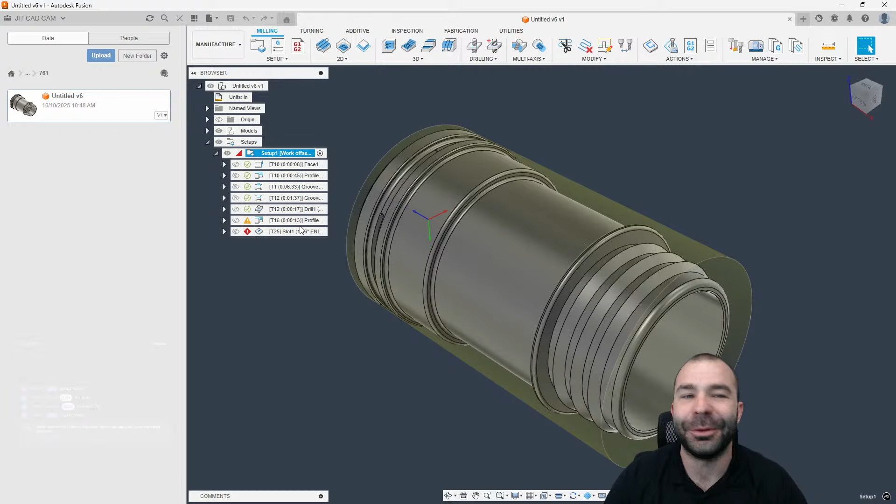Steven Casper's in the chat, which just so happens, we're going to go ahead and start sharing our screen, and we're going to kick this off in honor of him. So, of course, in typical fashion, I went ahead and made a Facebook post, and all of a sudden, we got like 8 or 9 different problems sent to us today. So, right off the bat, we have a lovely mill turn part.

Now, the concentrated area that we have on this part in particular are going to be these 3 slots on the part. So the first thing I'm going to do is inspect that very first one. And as you guys can see, that's a diameter of 0.75. Now, presumably, I would need an end mill that exact size to cut that slot perfectly. However, we're going to be able to get away with using a smaller end mill.

So from the start, the old school way to do something like this would be along the lines of doing a 2D contour. And with that 2D contour, we're going to go ahead and do a wrapped toolpath. And what we want to wrap around, again, this is anywhere that's round on your part. Moving a little bit further on, we now need to define our geometry. And if you guys don't know, you always just pick one and go from there. So there's some geometry, and we're going to see if we can get a toolpath.

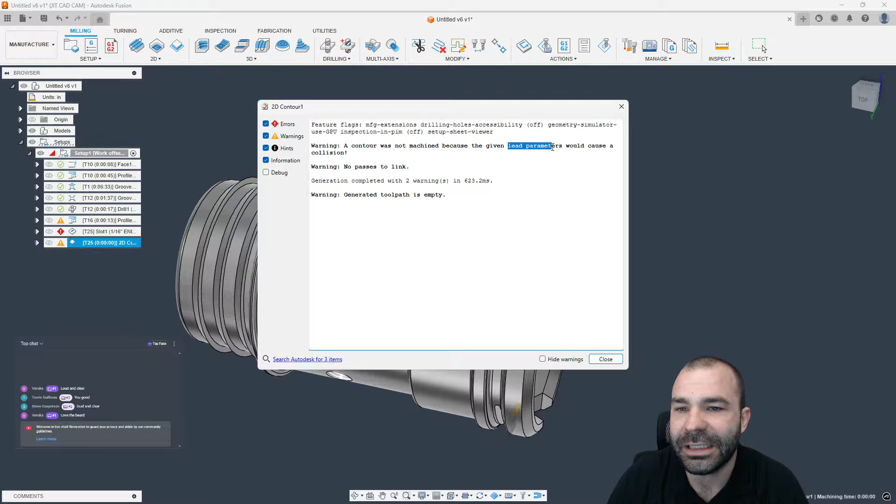Now, we are getting what looks like an error, which is no toolpath whatsoever. So right off the rip, this is the great thing about Fusion. I can't stress this enough: I love the fact that when there is a problem, at least it gives you some clues as to what to change. A lot of people overlook this, but as you're going to see, it tells you right here in this line: the given lead parameters would cause a collision.

So again, if you're new to Fusion, sometimes it's easier to turn off things like leads and transitions so that we can at least get the blue lines on the part. Now, as you guys can see, we do have those lovely blue lines on the part. However, something I'm noticing here, and we're going to do a little section analysis of this. So again, we're going to go up to Inspect, Section Analysis.

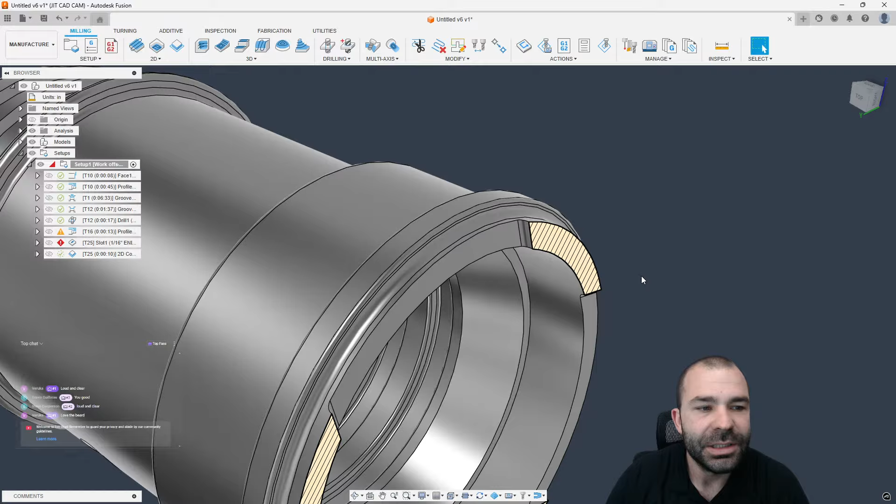Now, we could pull off the back flat of our part. I'm actually going to pull off the flat inside my part, and then I'm going to bring that forward just a hair. Now, knowing that we did have that 0.75, I could go 0.75 divided by 2, which is the width of my slot. And this now makes it so that I can evaluate or see what exactly those slots are doing.

Now, this is interesting because initially when I saw this part, I made the assumption that we were going to need to wrap a toolpath around the cylinder. And that's not the case here. So again, this is the fun of Fusion and being able to evaluate things.

Oh no, am I frozen? I am frozen. Is my screen frozen? It is not. Give me a sec, guys. I've had this in the past. I'm going to go ahead and kick my camera off, possibly back on. I may have to come back and restart something here. So give me a second here. So 1 second here.

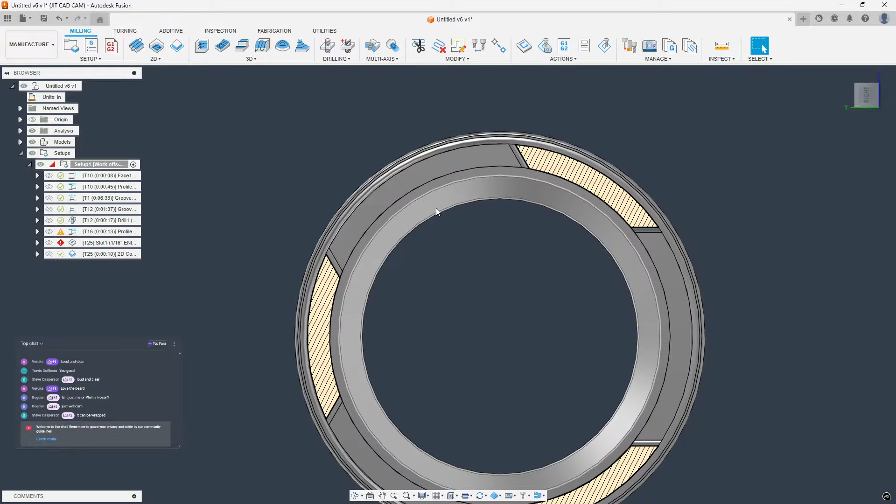So Steve is telling us that it can be wrapped. However, it really doesn't need to be wrapped. Now, the importance here is we are either going to need an end mill that is going to stick out long enough to reach all the way down to the bottom edge, or we can actually pivot to use what's called the trace toolpath. Now, the trace toolpath is great because although it's in the 2D section, it actually works like 2D contour, but allows you to follow different Z heights.

So if I go ahead and go 2D trace here, we're going to give it our curve that we want to follow, which is going to be that lower chain again. And then we're going to hit OK. And of course, as you may or may not be able to guess, I failed to use tool orientation properly. So let's fix that. We're going to go to our tool orientation. We want our Z axis to point upwards. We could use the edge or one of the ends of the cylinder. And just like that, our tool is now coming in from the top and tracing around that profile.

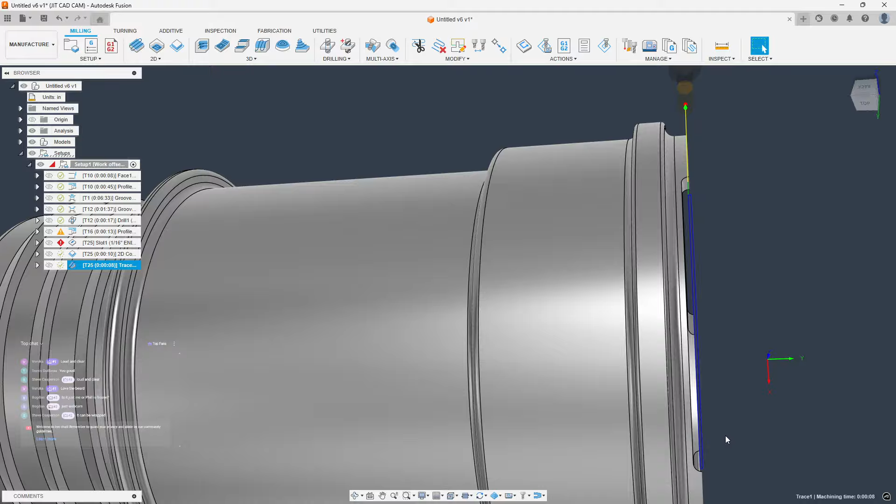Now, something we do have to be aware of here: trace by default is going to follow the center line of the tool. And we're going to need to turn on our cutter comp. So go left, of course. And now you can see we actually have our toolpath going down and around and coming back up to create that profile to cut the slot.

Now I'm going to reorder this a little bit because if I go back in my timeline, as you can see, Steve has already gotten a lot of his toolpaths in place. And if we hit F8, which is the hotkey, to get this section analysis out of the way, we can then update our CAD information. And just like that, you're now seeing that we are milling that slot. Now, just like anything in the world of 2D, usually you want to have a little bit of a breakthrough. So we can go ahead and add that in. And what you're going to notice here is in the trace toolpath for heights, you don't have contour, selected contour, right?

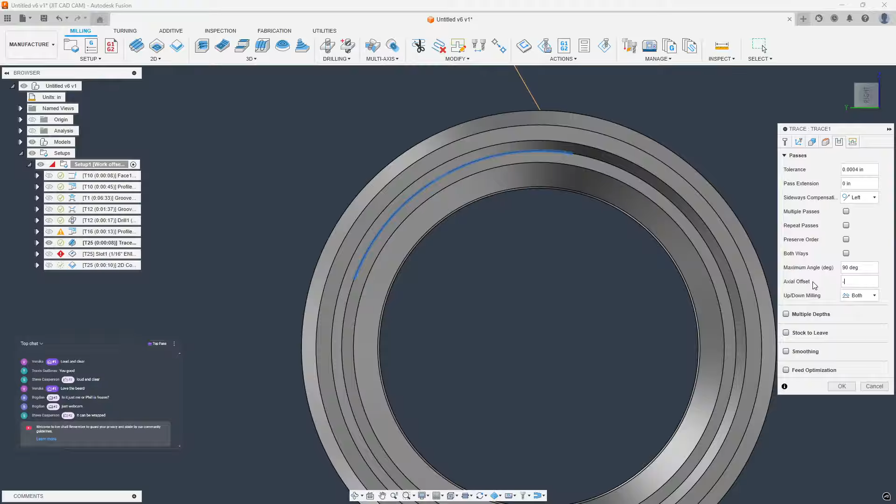So we're going to jump to the passes tab where we can actually set an axial offset. So axial offset is going to work the same. We're going to go ahead and say minus 0.05. I feel like every time I go in and punch that in, I'm usually backwards. And in this case, I am not.

So as you can see, if I was to simulate this toolpath now, again, props to the Autodesk team for the simulate with GPU. We could go ahead and bring that tool down. Again, we're going to go up, over, and back the other way. Now, as you're seeing me do here, we are still plunging into the part. So something we might need to do, and I don't know if it has it, is we do not have the ability to ramp down.

So again, this is one of those scenarios, although you could do a lead in and lead out, we cannot ramp that tool down to be able to cut that groove out. Now, me personally, if I was running something like this, maybe I'm doing 10, 15 parts, I might just hit this with some multiple depths and treat it like a pocket clearing type of situation. So again, as you can see, you could go ahead and set your multiple depths relatively easy, and then you're making multiple passes in there. Again, just kind of a high feed machining scenario.

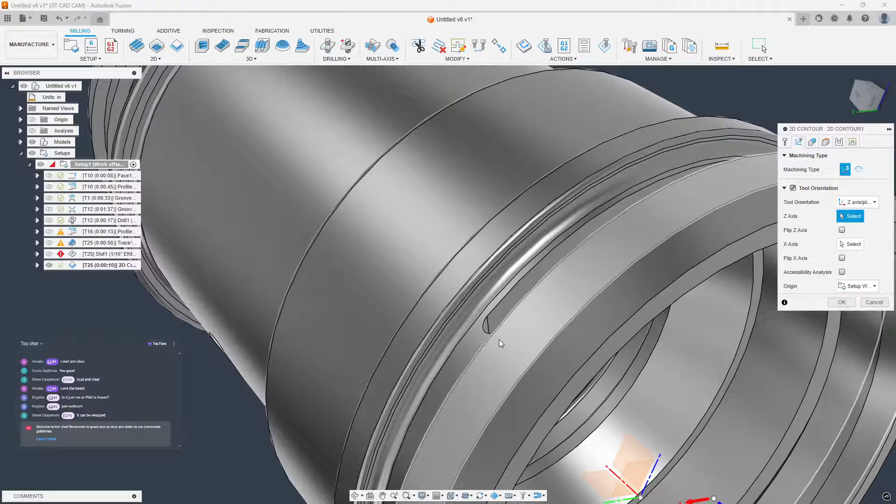This again is one of those things that based on what you're trying to do or how you're trying to remedy and solve this issue, utilizing something like 2D contour might actually work better, or not 3D. Actually, 3D contour might not be too bad, but not wrapping the toolpath as I initially did. Again, we're still going to need tool orientation here because we want our Z up. And what you're going to see in this example is the fact that this is actually going to sit flat across that whole part, versus following and trimming on the inside of that cylinder.

So again, what I would like about 2D contour is we could turn on ramp, and then just like that, we're now zigzagging down and ramping into that part profile. So let me know, Steve, in chat, does this look like it's going to work for you?

Again, guys, I'm going to go ahead and jump over, and I'm going to see if I can't get my webcam to reboot one more time. Give me a sec, guys. It looks like NVIDIA Broadcast is getting me. I'm going to go ahead and force restart that and see what happens. I used to have this problem in the past, and I think it was remedied when there was a Windows update, but since then it has come back to haunt me. So give me a few seconds here, guys. Again, if you guys have any questions, feel free to throw them in chat. Let me know what you think. Do you like what you see so far? Do you have any questions? And we're going to go ahead and see if we can't get this rebooted.

Ash Designs with a question. Hey, Phil, I'm wondering if it's possible to lock the B axis at a certain angle while spinning down a cylinder part, like a rotary parallel. Yep. So there is a way to do that, and I'm going to show you guys how to do that here in a minute.

Let me see if my camera is back up and running. You guys let me know. Am I still frozen? Of course I am still frozen, but I have a secret weapon. You guys are going to have to deal with my beautiful face. And now you can see my lovely flower background in my office. We're going to go back and see if we can't get normal back. There we go. We are back. All right. Now we can get back to our screen share. I can turn my lovely face on all these slides. Again, guys, at any time, if you guys have questions, throw them in chat. Let's get back to the old screen share here.

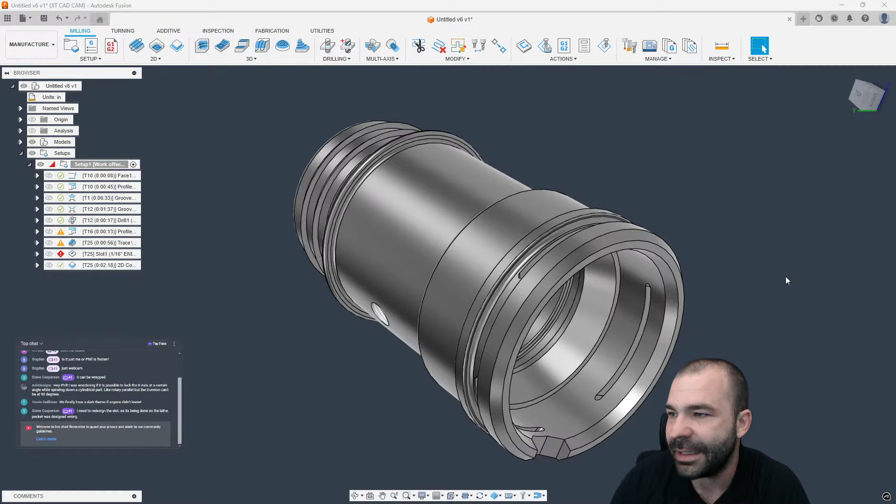Steve, I see you out there. I need to redesign the slot as it is being done on the lathe. Pocket is designed wrong. Okay, and we could remedy that real quick. Let's see what you got going on. You did a pattern, very beautiful. You did a straight extrude. Now that's not the case for what you need to be doing, but we need to wrap said slot. Now I am going to take this slot, and we're going to go ahead and double check your sketch here real quick.

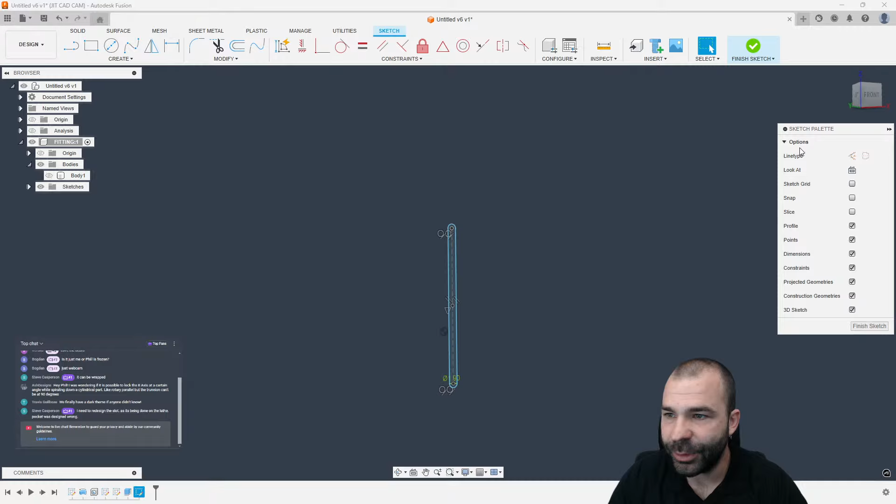Looks like you're utilizing a line to hold this on center. And I'm actually going to break this a little bit more than I expected. There we go. Let's get this dimension out of the way. And then what I'm really looking to do is move. Yours truly is having some problems here. We're going to remove this guy. We are going to get our body out of the way because I think it's going to work better for us. There we go. Square up to our part here.

And now with that, we want our slot to probably be a little bit off of center because this is going to wrap around our part, right? So I'm going to go ahead and throw in a construction line on this guy. Maybe. Man, I'm just not having luck here. Oh, I got 3D sketch turned on. Guys, that'll always cause you kinds of problems. Let's get 3D sketch turned off. Let's go ahead and do our normal sketch now. And we might have to back this up a little bit further because I may have butchered this long before.

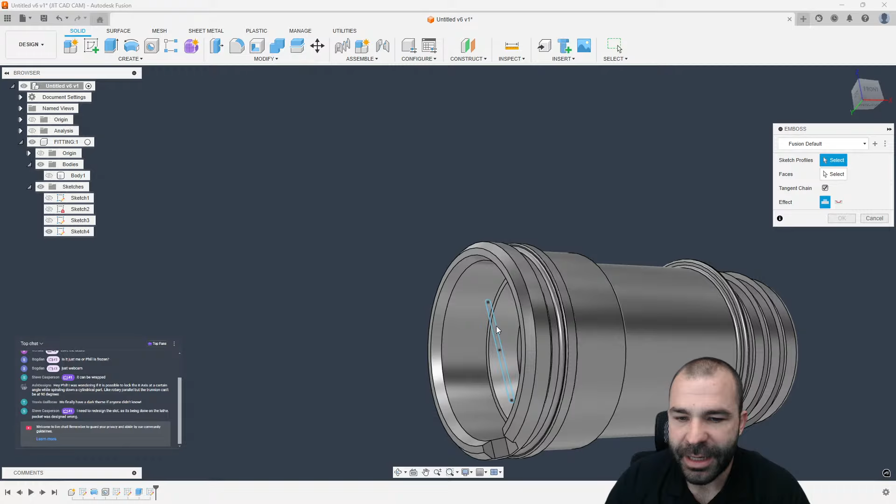We could go ahead and try to wrap this. I don't think it's going to wrap where it sits. And I don't want to bore you guys to death by having to go in and make a bunch of changes. But what we're looking for is under the Create tab. It's called Emboss. Now, we're going to go ahead and revert our position back because, of course, yours truly started moving things around. But we want to take that sketch profile, and we would like to wrap it around our cylinder. And this is what I was worried about, is I did know that we were going to get an issue because that actual slot is down on our part.

So what I'm going to do is I'm going to go ahead and start with a fresh sketch here real quick. And I'm going to do an offset. Actually, we won't need to do an offset plane. It'll be all right. There we go. We're going to sketch on that flat. Apparently, I keep moving stuff around. I'm going to create a brand new slot here, center to center, just to be safe. And now I am doing this off to the side, guys. So just so that you're aware, if you're trying to do this at home, that is what's going to happen.

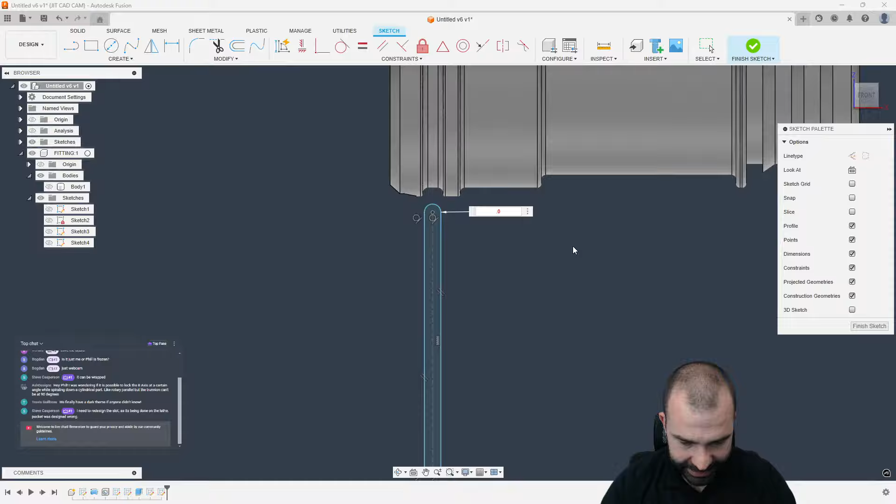We're going to go, what is that? 0.75, technically divide by 2 because we are radius. And of course, it jumped out in the middle of nowhere. Try that one more time. Maybe my math is just way off today. Let's just go, we're going to go 0.62. Oh, because we're in millimeters.

Do you guys see this? You guys see what you guys put me through? This is why I get all the fancy support tickets and all that fun stuff.

We're going to go back to inch. There we go. And for those of you wondering, yes, at the end of the day, we could have very easily went in and actually just said IN versus the other 0.075. There we go. Actually, it's 0.75 divided by 2. Give her a second to update. There we go. And now we can get this guy moved semi to where that slot is going to go, right? So again, using the emboss feature, you can't be on center line of what you're doing, which is why I've created my sketch down here. Now we should be able to get the emboss feature to work.

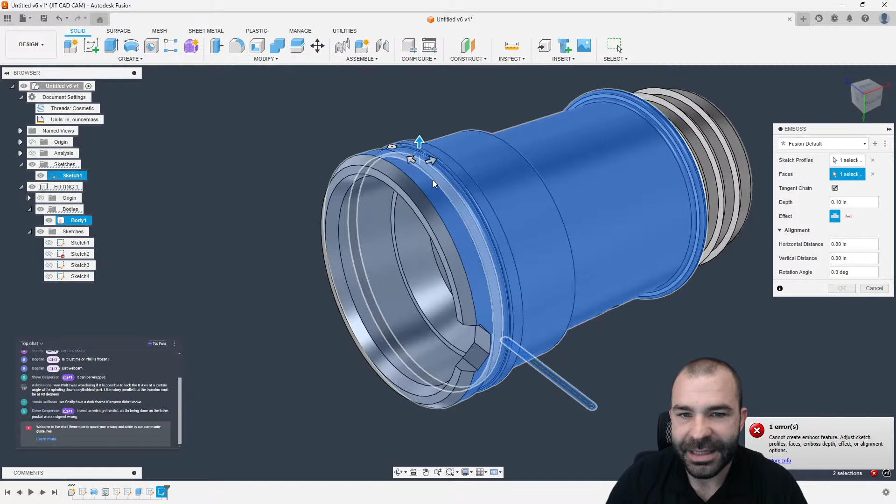And in this case, we're going to go ahead and do a deboss. And maybe I'm crazy in my thinking here, which would be pretty normal, right? Is that this is not working to my advantage when it should be. And we may have to make a few more adjustments, but I don't want to get too caught up in this. Again, the emboss feature works great. I'm probably doing something wrong. It's usually on me, as you guys know. We're going to go ahead and jump to another problem here, and we're going to have to see.

So we finally have the dark theme. Travis, 100%, the dark theme is completely available inside of Fusion, if you guys didn't know. Now, this is a personal preference thing. I'm not really a big fan of it. Maybe I'm just stuck in my old ways. But how you can set that up is I'm going to go into my preferences, and I'm going to go down to either Fusion, or you could, I apologize, dark blue, or you could do match device theme.

So as you guys are going to see here, as soon as I hit apply and OK, I am now officially in what is referred to as dark mode. And just like that, you could have your display and your toolbar and all that fancy stuff now dark. Again, putting this out to Autodesk, it'd be nice to see black outlines on all the icons, I think, or white outlines, something of that nature, so that they pop out a little bit more.

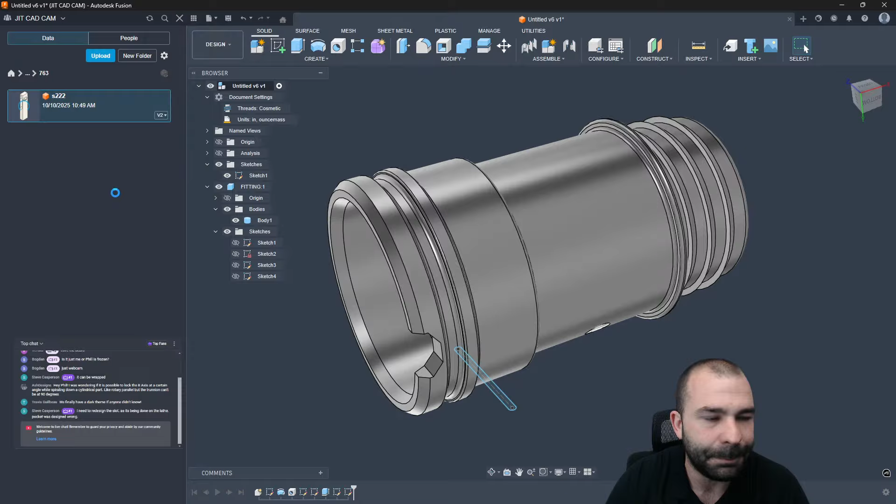So let's go ahead and shift gears. We're going to go ahead and open another part here. We will come back to this at some point today if the questions slow down, of course. We got to get back into the right folder. We're going to jump into this next part. Actually, it's not going to be that one quite yet. Let's go 763, is it? Yep. So somebody sent me this part.

This is another really fun part, but if you guys can see, we have these green surfaces inside of here that they are wanting to 3D machine. Now, for those of you that don't know the great world of machining, if I go in and I actually do an accessibility analysis from the top, what you guys will notice here is anything in red there is considered undercut, right? So if I'm looking at this from this angle, I would need a second operation to come in from the side,

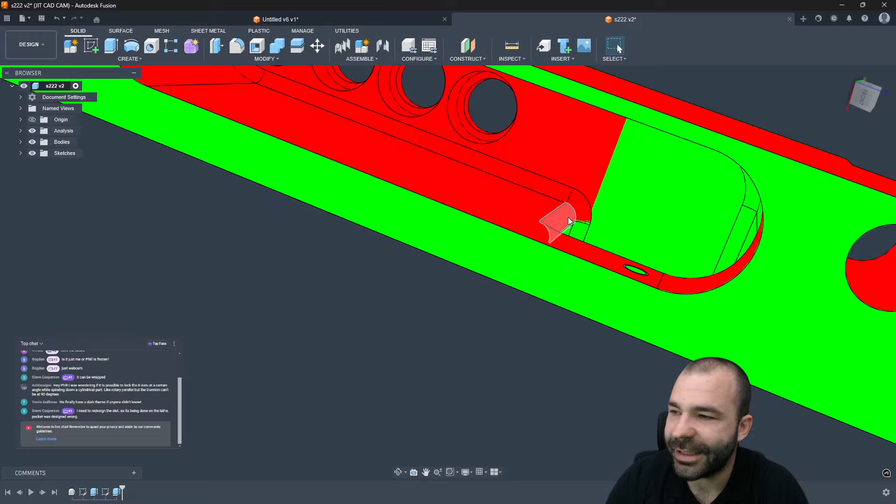but it gets worse than that, because if we did another accessibility analysis from the side of the part, as you guys are seeing, we now have undercutting back the opposite way. So this feature is a very hidden feature when it comes to machining. Now, there's not going to be any good way to really do this. We are going to have to do this across two setups, or if you have a 4th or 5th axis machine, it's going to be much more beneficial. But I'm going to show you guys how you could get some tool paths down in there. Let's go ahead and jump into the manufacture section.

I need to grab a drink here. Also going to go ahead and check the ticket system here real quick for you guys. Want to make sure that nobody has sent us any tickets outside of the ones that you guys have already hit me with.

So let's go ahead and start doing some of our setups. So again, we are going to have to do this with two separate setups, or you're going to need a 4th or 5th axis. And what you guys are seeing me do here is nothing more than setting my X's, Y's, and Z's. I'm probably going to put this on a UMC type of machine. It'll make my life much easier. And just like that, fixed size box. And it looks like we are getting some pretty wild rounding on this part.

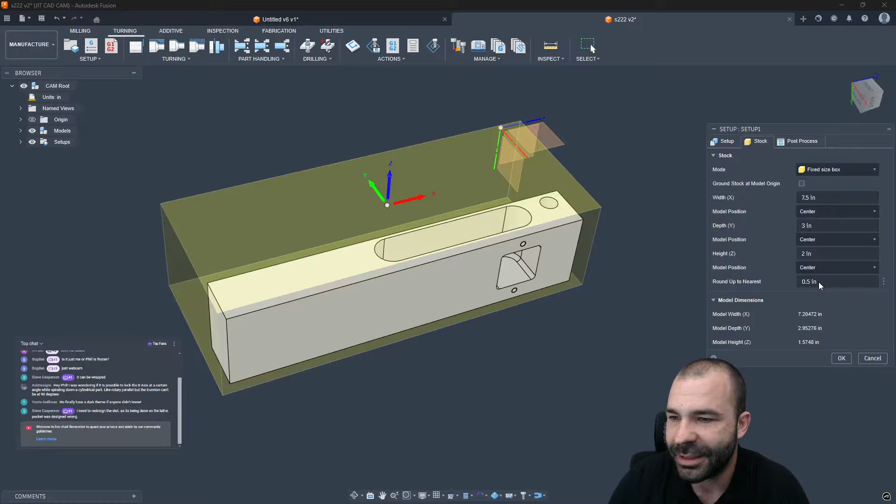Now, I never check my models, but occasionally there's a million things going on inside these files. So what we're going to do is jump back and make sure we define the proper model, as you guys can see. And then for the sake of this part, we're just going to go ahead and round up by 0.5 as if it's coming out of a squared up block of material, right? This is just going to make everything we do at this point much easier.

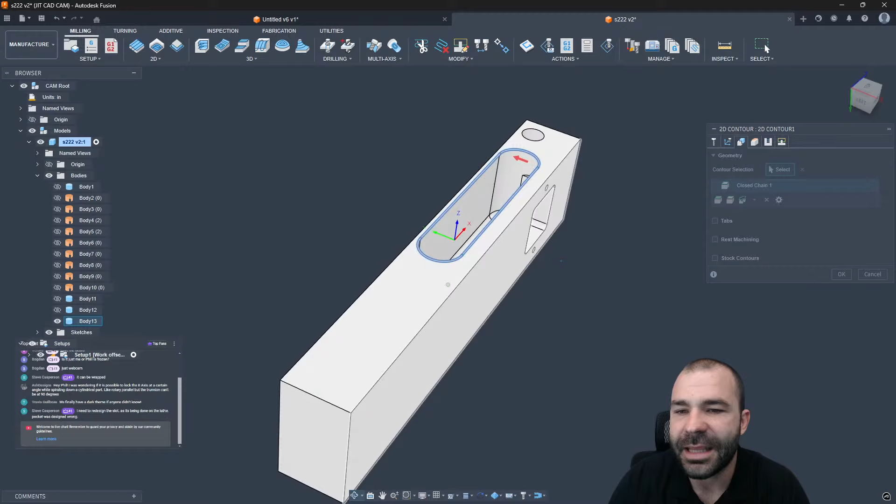Again, I'm going to make my life easy, and we're just going to 2D contour. And I'm going to utilize probably a 1/2" end mill. If you guys don't know, I love the 1/2" end mill. Tends to work quite well for a lot of things. And the geometry I'm going to use is the upper rail. Now, I'm going to put this out there in chat, guys. Why is it that you think I'm going to use this upper edge to define my boundary versus any other edge on this part? And I am going to now just go ahead and define a different lower height.

So as you guys are looking at this, we're going to go ahead and go no lead in, lead out. Again, cheating and using ramp. But as you can see, I'm now zigzagging down inside of my part from the top. If this, again, was something where we're starting to discuss utilizing a 4 or 5 axis machine, this is where I might pivot to 2D adaptive clearing. Let's say, for example, we switch to a smaller tool. I believe I have a 1/4 inch tool around here somewhere.

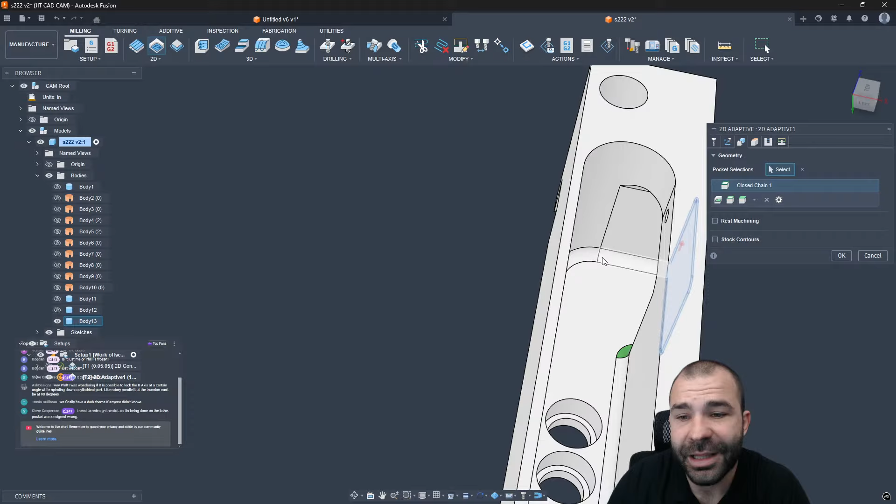We do our tool orientation to the side. Again, pocket selection. As you guys are seeing, I'm picking this upper chain here. I'm not utilizing a lower chain. And again, the reason why I'm not doing that, if you guys are wondering, is because there is no connection across that bottom chain. Same with my top view, this upper chain, upper rail, it would have actually extended out under that overhang, causing some more problems.

So again, utilizing sometimes a different chain and manually setting your heights can make all of the difference. So again, we need to go to a certain depth, which is going to be this guy here. And that is going to achieve us a roughing out from the side. Again, this is where we could go in and derive straight into a 2D contour. And basically what I'm going for is just to get you guys a nice clean kind of pocket through the part. So let's now talk about how we're going to achieve those green surfaces, right?

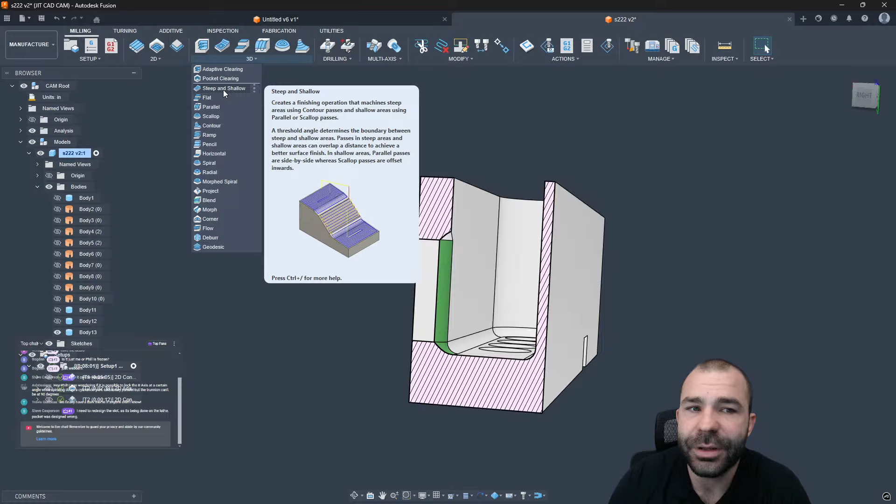So again, this is where section analysis can be your total friend. So we're going to go in, I'm going to go ahead and section analysis right here. And just like that, we can now see our inside corner as well as the surface that I highlighted in green. Now, there's only a couple of tool paths out there that can actually utilize undercutting. Now, for me, the number one that I like is the steep and shallow tool path. So the question was, can I do this with a lollipop style cutter? And the answer is yes.

So again, I'm going to go in, we're going to select a lollipop style tool. Again, the Fusion library has quite a few good ones out there to start with. Keeping it easy on you guys. I see a lot of people go in and they try to build a tool and then make a tool path. If you can find something close, it will help you make a good tool path to which then you can modify your tool. So as you guys can see, we have a 1/2 inch ball or lollipop style cutter.

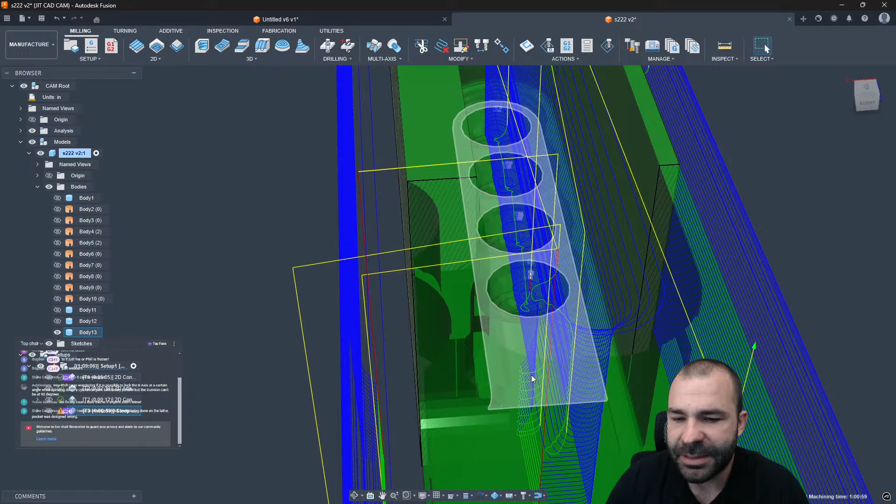Again, we have our geometry section as always. I'm going to jump over to the passes tab because the moment we swap out to steep only, we're going to get the option to machine undercuts. And with that, we can go ahead and let this do whatever it's going to do by default and adjust. Again, guys, it is very important at the end of the day to just get a tool path on your part. Now, as you guys might be able to see, my big head is probably in the way. We are swiping down and underneath. And if you notice here in my stock model, I am now touching that wall, right?

So again, this is one of those things that, one, you saw me do very little other than tell it that I want to allow it to undercut the part, but I can go back at any time and now adjust my boundaries. In this case, my boundary could be based on a silhouette. I would like to stay inside that silhouette or maybe tool center on that silhouette of my part. And now we should transition into machining down underneath inside those walls.

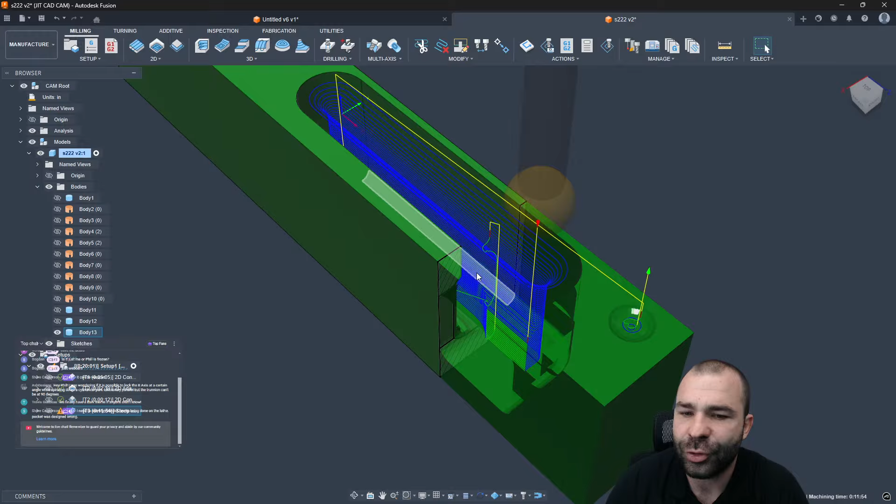Now, if we wanted to get more technical than this, we could, of course, reduce our surfaces. We could actually sketch a boundary profile. There's a lot of different ways to go about it, but I think some of you are starting to see the value of being able to loop down and around to get that undercut type of motion. And again, I'm going to go ahead and turn my stock off. It'll be much easier for you guys to see.

Now, if you have toolpath trimming, this is a whole other scenario because, again, you could toolpath trim, which you would have toolpath trimming for the record, because it comes in the manufacturing extension. So as you guys have seen there, I've actually trimmed that the wrong way. We only want to do what's inside that area. Again, I could actually trim this one more time on top of it. A lot of people don't realize you could actually double trim things here.

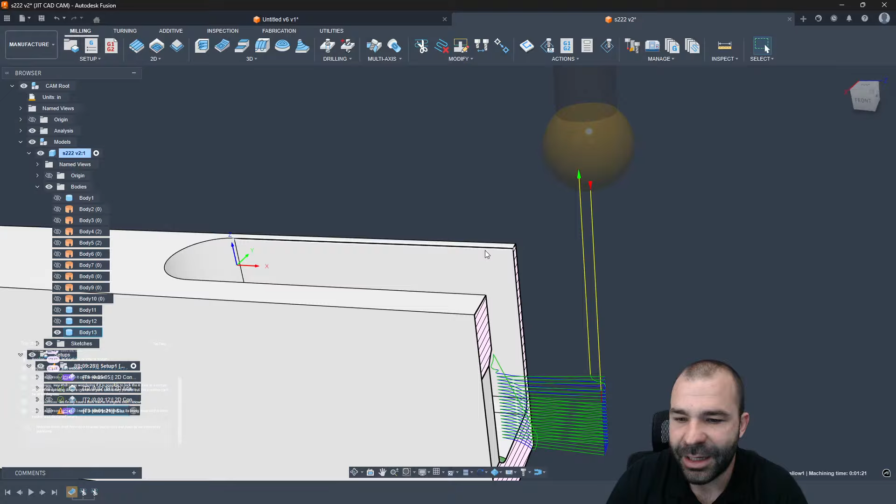So we're going to go ahead and trim one more time. I would like to actually do everything outside of that area now. And just like that, we're only doing the wall, right? So again, getting that undercut area, we could remove this. We could cut this down more. We could, of course, go back and adjust that lovely polygon that we've made.

Because now I'm realizing, you know what? I really only need to be in a certain area, which is that little window undercut, right? So as you guys can see there, now we're undercutting that area and everything is set clean as can be.

One other thing that I did see, I want to see if it'll work on this part when it comes to toolpath trimming. I'm actually going to untrim the backside here. But you do have the ability to use planes, and I think we tried this before, but you can't quite use... Yep, so you got boundaries, and okay, so we could do face contours possibly. And if I pick these faces...

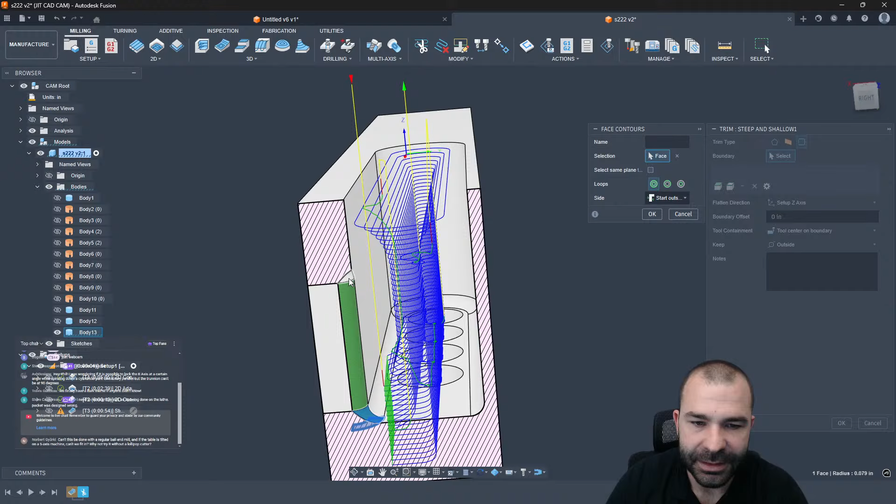Now, the problem is, for some reason, I can't grab this green surface here. And I believe I actually do know why that is, because I'm thinking in the wrong direction. So in typical fashion, yours truly is having a problem with thinking inside or outside the box.

Now, the real thing that we're going to have to worry about, I think we are going to need a boundary offset here because, again, this could be based on center line of the tool, but we're going to see what happens. We're going to go inside, see if we get any toolpath, and we don't. So I would need to add in, more than likely, the radius of the cutter at a minimum. Let's just go 0.3. And just like that, again, utilizing different things inside the software.

Again, this is all toolpath trimming, guys. I would still need to possibly come in and trim it from the side. As you guys are going to see here, we go ahead and throw another trim on. Boom. I guess I could actually trim this again, second time through. We're going to utilize boundaries, face contours, because, oh, we cannot, because we are not looking in the same direction.

So again, toolpath trimming is great. We would actually have to go based on which way we are set up, Y. And let's see if we can do it this time. There we go. So look, even yours truly learns that in the great world of Fusion, they have thought about just everything. I needed to change the flatten direction.

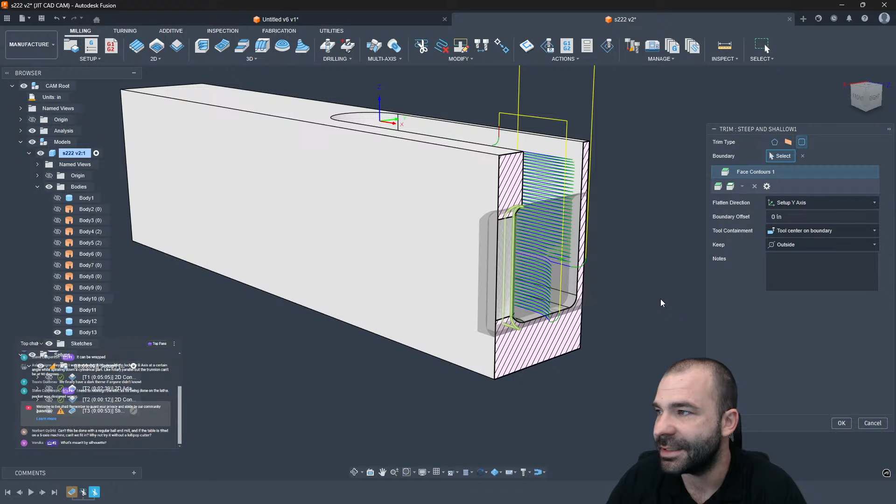And again, what you guys are seeing is that little gray box that is hiding behind my head. We are going to now trim across the part that way. Again, I'm going to go ahead and throw in like a 0.3 boundary extension. And from that, we should get a pretty good trim.

What's meant by silhouette? So on the silhouette side of things, real quick, let me go back here. We, of course, need to keep whatever is inside that area, guys. But a face contour, when we pick those face contours, it creates a boundary around a silhouette of the part. A silhouette, in theory, if you've ever seen it, is the old-timey photos where they do the side profile and it's just a black and white piece of paper. It's a silhouette of whatever your shape or profile is.

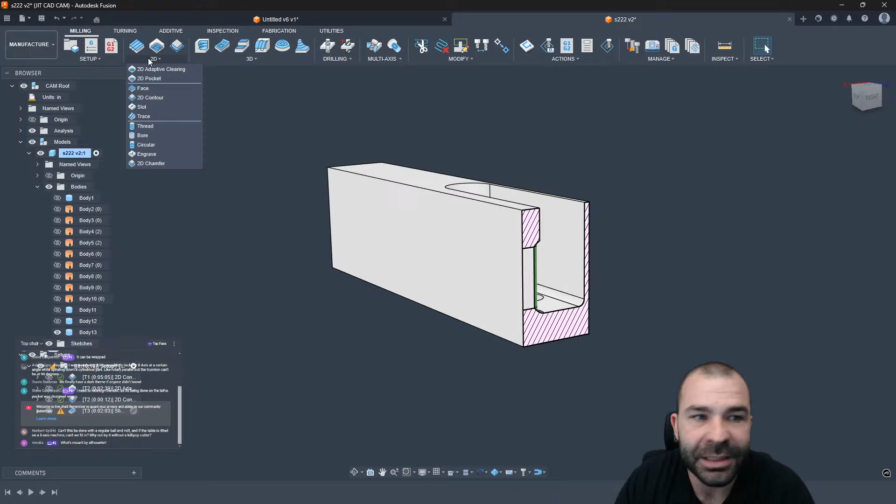So again, guys, as you're seeing me do here, some more trimming, some more fun, just to get in and get around the inside corner of that part. Now, again, same thing. If it was me, I would be focusing on steep and shallow. Now, if you didn't have the machining extension, I don't know why you wouldn't have it unless you just ran a 2-axis lathe.

But if I go in and I do something with 3D contour, this time we're going to go ahead and do our tool orientation. We go off the side of our part this time. I am going to possibly set a boundary. Again, silhouette of our part, tool center based on that.

And then with that, I think a lot of people don't realize what 3D contour does. You learn this lesson the hard way like I did, where I had 2 mold cavities that stacked on top of each other and I didn't pick the lower one. And what do you think happened? It wrapped around and went underneath my model. So as you guys can see, again, 3D contour is wrapping around and undercutting that profile from the side.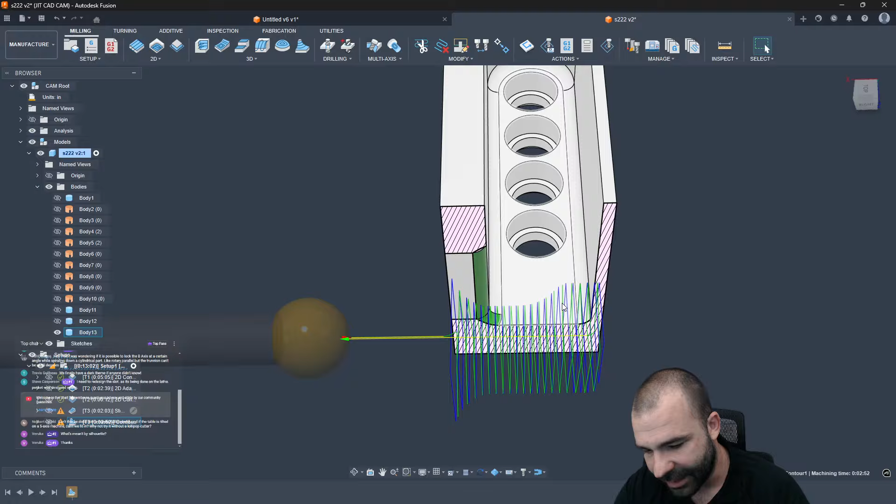Again, I'm going to go ahead and hit F8 here. And you guys are starting to notice that right there inside my part, we're starting to blend this back and forth. Now, ball size, additional settings outside of that. Let's get our analyze turned off. Luckily enough on this part, for some reason, they didn't actually fillet anything around the underside of this face as well.

But if we go in and we do our simulation, we should be able to see this. So there's our toolpath coming in. Again, it's going to start very high. We could adjust this with our heights tab, of course. And what I'm doing, again, this is a pro tip for you guys. If you click on screen and drag left or drag right, you can speed up or slow down your toolpath. So instead of pushing play and trying to make a guesstimation on what's going to happen, you're noticing in real time, I'm just dragging my mouse across the screen.

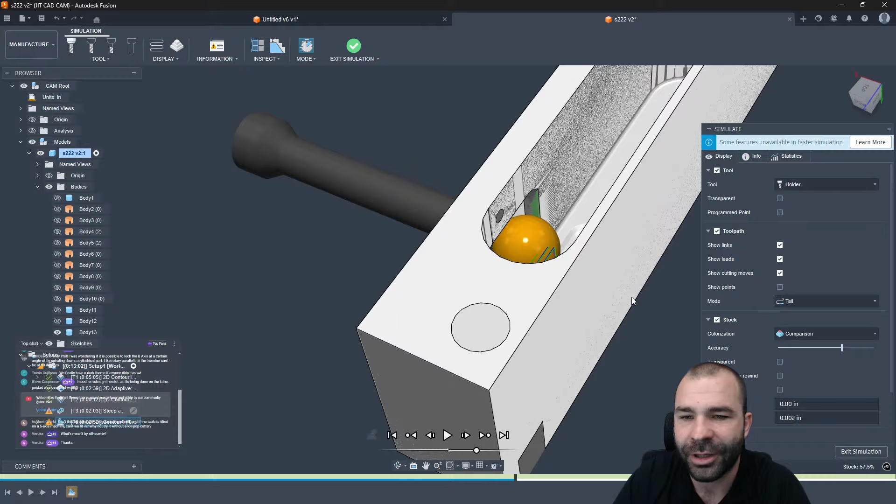And at this point, I think we are starting to undercut in that surface. We are. And if we get a little bit further, oh yeah, we got that blue starting to disappear. And let's go back just a little bit further. Might have to go just a little bit further than that pass. I'm trying to get you guys some good examples here. I might have to turn my accuracy and stuff up. But again, this GPU simulation is quick at the end of the day.

And you'll notice that we are getting green surfaces versus the blue surfaces. Due to tool ball diameter, as you guys can imagine, we can't quite get fully at the top or the bottom, but we are getting exactly that. We are reaching this from both ways to more or less get underneath that actual area and cut those surfaces.

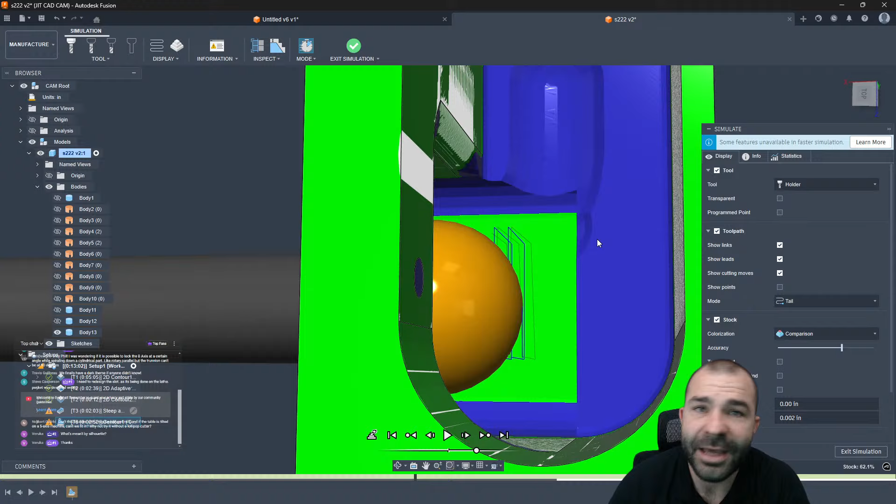100% Norbert, I love the suggestion. Can this be done with like 5-axis positioning? It could 100%. So again, I wanted to show you guys this kind of method here because, if you did not have a 5-axis and you wanted to set this up in a 2-setup, 3-axis kind of configuration, I would still need a second setup, guys. I didn't build that all out, but I could go in, as being suggested, what about if I was to do something with like a small 1/4-inch ball end mill?

Still the same scenario at the end of the day is we could go in, we could pick our toolpath. You could go contour. Maybe you're going to go parallel. This is up to you. But based on that, I'm going to go ahead and swap out to a much smaller tool. So again, we'll go into our default library. Let's see what we have in the shop crib. Ball end mills, 1/4-inch ball end mill.

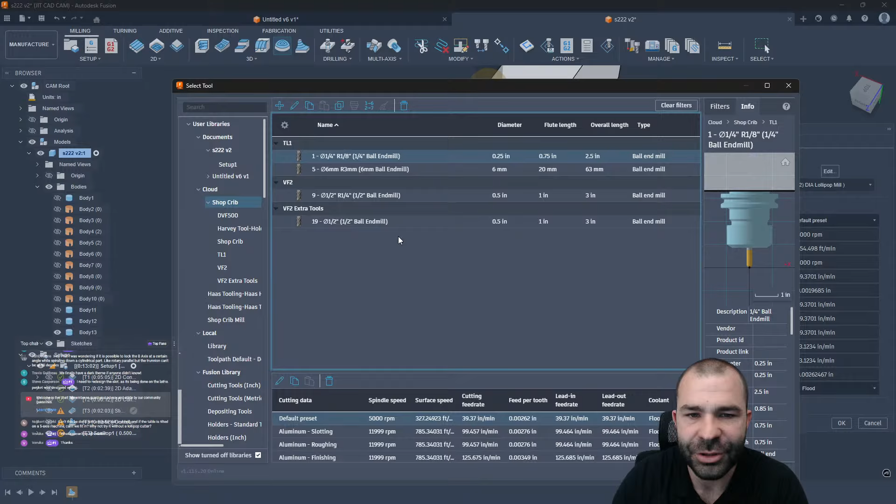And we are going to need to swap the holder out on that. Give me one sec here because, oh, those are all 1/2 inch. Has this got a better holder? It does not. Let's edit this tool here real quick. And we're going to go ahead and set our holder to hopefully stick out a lot more. Or if you guys didn't know this, we could, of course, add like an extension shaft here. So we'll go ahead and add a couple pieces. Just say we have 2 inches or so.

As you guys are seeing, I'm butchering this pretty good. Let's delete this one. There we go. Let's add that back in. And let's say we had a 4-inch extension. And then we are going to have to change our stick out as well. So this is going to be probably like a 4-inch stick out. Overall length is, of course, going to have to update. This is a little bit of the finickiness side of Fusion.

Now, hold on, guys. I'm going to fix this, I promise. I pushed in the wrong diameter. My fault, okay? So again, let's say 0.5, 0.5, and the height is what needs to be 4. And just like that, you guys can see we now have an extension or a shaft. Again, you could add taper to this if you guys want it. Let's say it goes from 0.4 up to 0.75. In this case, again, I'm upside down. Good news is in real time, we could see how badly I'm butchering this. So now we should have a tapered kind of extension on that tool.

The reason why we would want to taper on an extension tool like that is because we have a lot of tight clearances in here and we're really just trying to get down in there to machine those surfaces. Now, a trick here is going to be the fact that when I do my tool orientation, a lot of people don't know this, but if I'm looking at something like here and I'm like, you know what, I think I could do a lot with a tool at this angle, I could actually just hit align to view and I could turn on accessibility analysis.

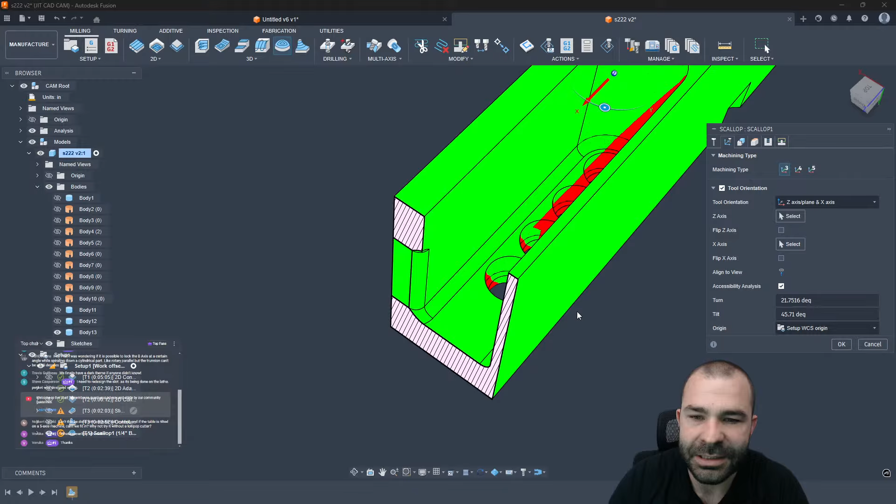So again, it's one of those things that you have that ability to turn on different tools inside of the software. Get my section view out of the way. And just like that, anywhere in red right now based on my view is basically undercut. So again, these are some neat things to be able to help you guys build out a much better and a much cleaner tool path. So again, we go ahead and hit OK, and then we can adjust from there.

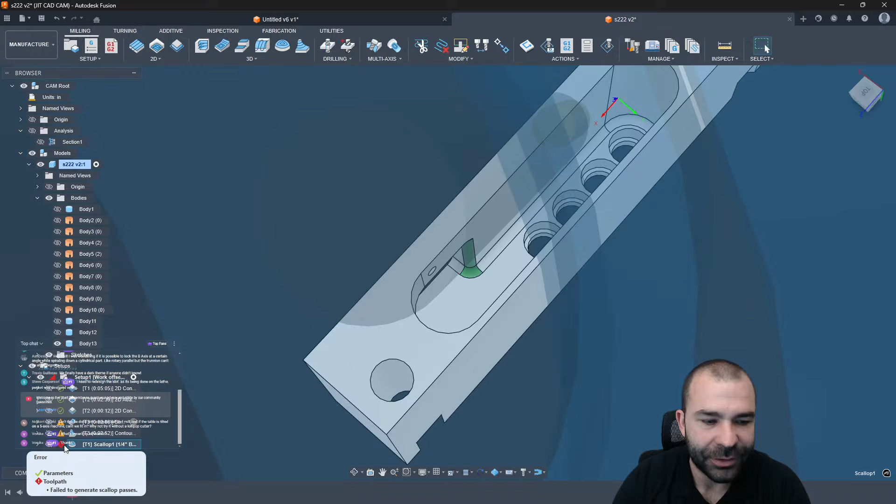And I think we need to be a little bit steeper here, or because of yours truly's graphics settings, let's see what kind of visibility we have. We are looking for camera, ortho only, and then let's see if we can align to view. There we go. So that perspective with ortho faces will get you from time to time. And again, we can narrow this down and trim it out, or you could use things like, again, I want to do a selected boundary this time.

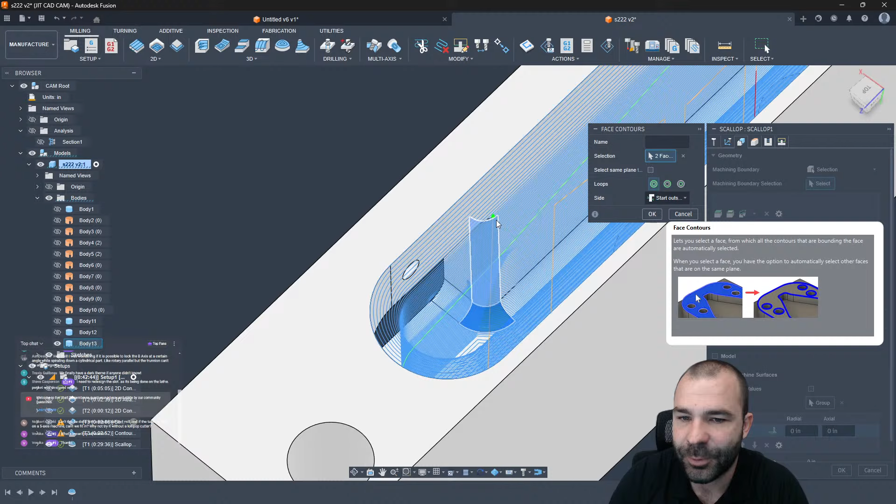You guys are going to see with this selected boundary, we now have a window of that area based on our view, and we will need to adjust this more and more. Again, based on your view, all over again, we could do face contours, this one, and possibly this one. Again, what we're looking for is a boundary to limit our toolpath based on the angle at which we're looking.

So again, you do have some undercutting here. I am using scallop. Scallop is not an undercutting kind of toolpath. So I can quickly derive out, go to another 3D milling toolpath. Again, depending on what you guys are going to use or what you want, we're going to go straight into 3D contour. Again, 3D contour has the ability to do some undercutting. Now, if it was me, you're going to spend a lot of time basically angling and adjusting and getting in there to do whatever is needed.

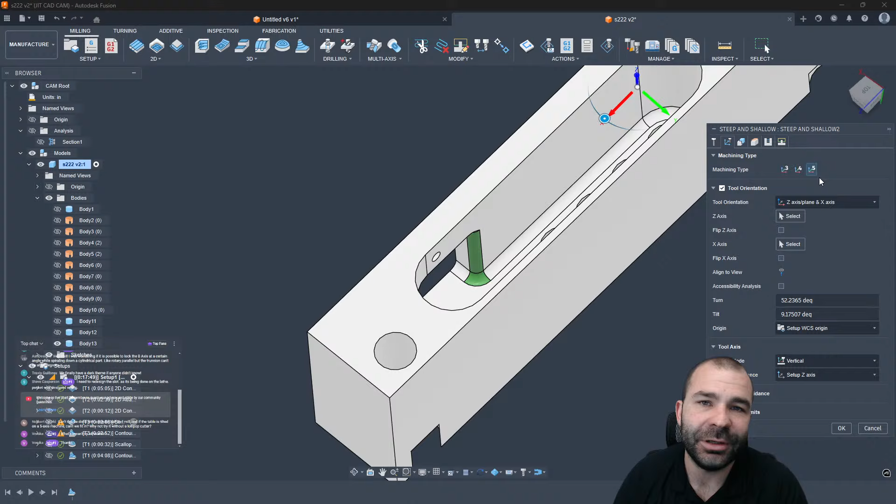This is also one of those scenarios where, again, you would need the machining extension, but if you go to something more like steep and shallow, same thing again, steep only. And then my recommendation would be you could just go full 5-axis contouring. Now, why you may or may not want to do this is all dependent on part quantity, how fast you need to get it done, what the end goals are of what you're working on.

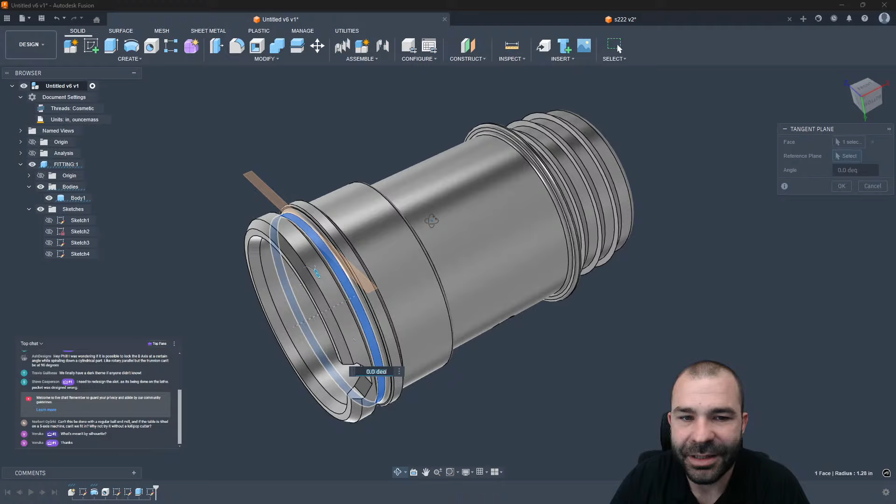So let's go ahead and pivot. I'm going to go back to this part because I really want to get that wrap toolpath to work, and I have a couple ideas of why it doesn't work. This is pretty standard for me. It's on me, guys. It's always on me. So what I'm going to do is remove my sketch. I'm going to do the wiser thing this time, which is do an offset plane, or even better, tangent plane to that inside cylinder. So as you guys can see, I've now done a tangent plane to that cylinder.

I am going to 100% steal this sketch here. So we're going to create a new sketch up top. I'm going to do the old P for project, and we are going to project the original slot. Again, as you guys can see, I now have that lovely purple color up top, and that is going to be what we're going to wrap at the end of the day. So what you're going to see me do is go back to that emboss tool, this guy, around a face. And you know what I might be doing? Let's do this. Let's uncheck tangent chain.

Let's just grab that. There we go. And then we're going to actually pull that down into the part because we want it to cut. And just like that, we are now cutting that slot, and it is wrapping around our part. So again, of course, I'm not going to have our analysis anymore because I went ahead and deleted my features.

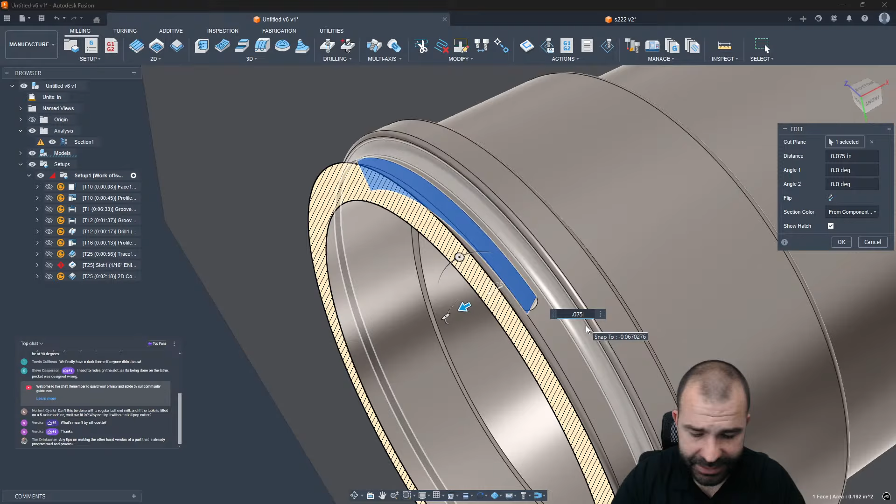So let's add a brand new, actually, we're going to jump back over to manufacture because I do have the one that I wanted over here. And I believe I actually put that taper in the wrong spot, but I think we're going to be okay, right? So again, my cut plane is going to be based on the surface, 0.075 divide by 2 to get us on center. Actually, this one's going to be negative because I picked the wrong, divide by -2. Maybe not. Divide by 2. Negative 0.075 divide by 2.

Hey, man, I tell you what, it's been one of them weeks. How you guys feeling out there? How you guys doing? Any questions?

So again, we now have our slot. Our slot is actually cone-shaped to the center of our axis, and then we can utilize some things with that. Can you cut the slot without the tapered walls? So Veruca, cut the slot without the tapered walls. We did do that originally when it was a straight-on slot.

So from that, as you're going to see, we're going to go ahead and utilize a couple of different toolpaths. Now, this is where I was saying that if we were going to wrap the slot, this is where it points to center. Again, we're going to do our wrap toolpath around a cylinder. I am going to select a contour for wrapping around. And of course, we're going to get an error, and that error is going to be based off the fact that we can't do the lead in, lead out. We already know that. I can ramp down a wrap, which is kind of nice.

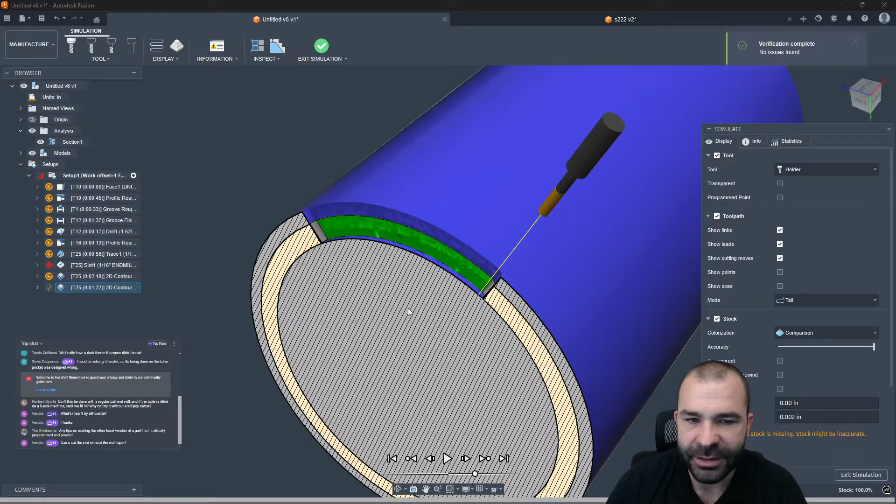Now, the real problem with this scenario, and we're going to go ahead and jump back over to simulate. And we are going to crank the accuracy and hope that my computer doesn't explode. So what I'm looking for here is that when we cut down that surface, one thing you may or may not notice, and it's not going to be very noticeable on this part, but I want you guys to be aware of this, is center line of this tool diameter points to center of the rotary axis.

Now, the diameter in the corner of this slot, or the width of the slot, is greater than. So by picking the lower chain, it is allowing that toolpath to move out further. If I pick the upper chain, it will bring the toolpath in. However, your slot will never dimensionally actually check out properly with a wrapped toolpath. This is why instead it would be better to do actually something like advanced swarf. Again, advanced swarf allows you to do fourth axis. We're rotating around Z because we are on a lathe.

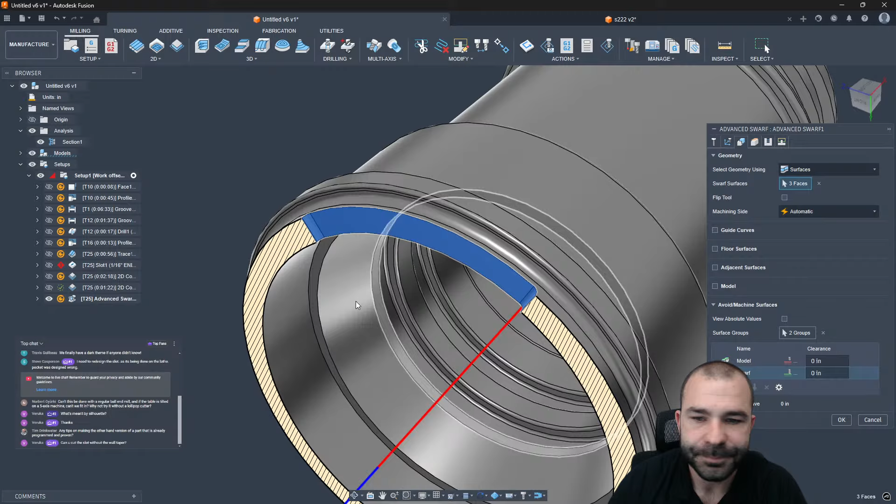I can go ahead and pick my wall surfaces here. I will have to turn that section analysis off so I can grab the back one. Again, this is another way to approach this and another way to machine it. Now, when it comes to the setup of swarf, there's a lot of ins and outs about it. I think we are also going to have issues with our lead in, lead out, which is why you're seeing me remove those real quick, because we always want to get blue lines on our part before anything.

So what I'm going to do is I am going to avoid using surfaces. We're going to go the good old-fashioned guide curves, upper and lower. And we're going to see if we can't get that toolpath on there. Again, let's just double make sure that our tool is the correct size. Now, there is another thing that I'm almost certain is haunting us, which is our shaft and holder clearance, like always. So we go ahead and take a peek at that tool. We do have quite a good amount of stick out. So I'm going to just go ahead and zero these two guys out and see if we can't get closer than that.

In the meantime, if you guys have any questions, throw them in chat. I see Tim out there with a question. Any tips on making the other hand version of a part that is already programmed and proven? Run that by me one more time, Tim. Making the other hand version. Oh, okay. Like a mirrored version of a part, right? That's what you're referring to, Tim?

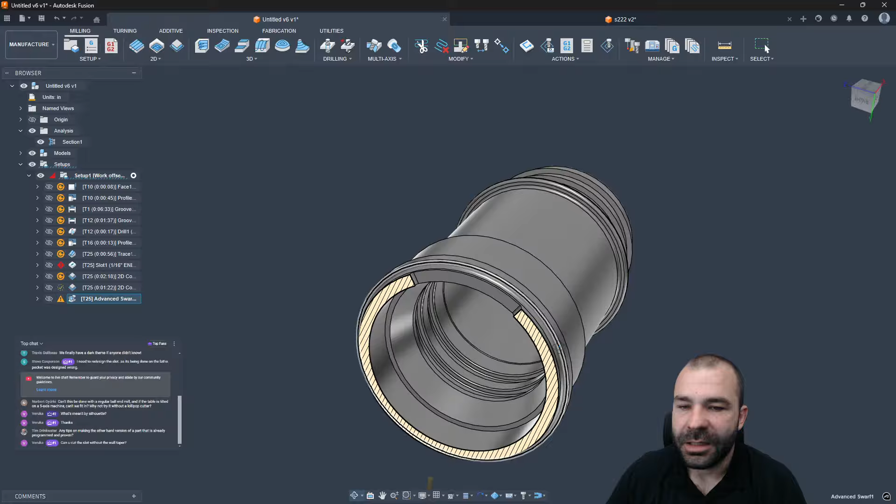You know what we could be missing actually is a floor surface. Let's go ahead and add a floor surface in. I feel like the floor surface has haunted me for the last couple of weeks.

Spiraling down a cylinder part. That's right, Ash. I completely forgot about that, but I got you, buddy. I got you for sure. We could do that. So Ash wants to know about spiraling around a part. In this case, there are a lot of options when it comes to that. Now, keep in mind what initially I would point you guys to if, and this is a big if, you want it to stay perpendicular to the part, right?

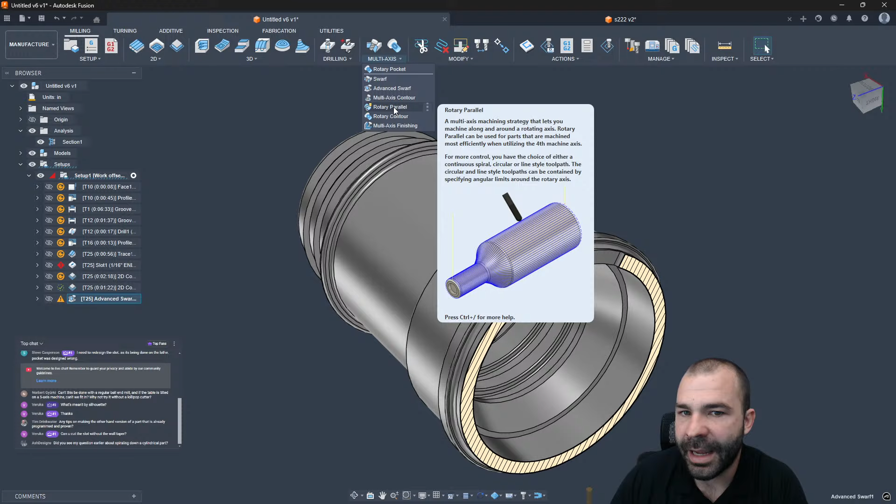You could do something like rotary parallel. Now, rotary parallel at the end of the day doesn't have something like tool orientation. So you can't tilt the tool and wrap the tool around the part. Now, I'm going to use this as an example, but if I wanted to, in this case, I could switch to something more like geodesic. And again, this is where we could play that game of pulling our end mill.

I'm going to go ahead and grab some type of ball end mill that I have out here. I believe this guy will work, a little bit large, but we could base this off 4th axis or 5 axis. And with that, we can actually change out and say lead and lean. Again, if this is dependent on your machine, we could also go in and say tool axis limits. There's a lot of ways to achieve this, but let's say we're going to go 4th axis around setup Z. We're going to leave lead and lean alone.

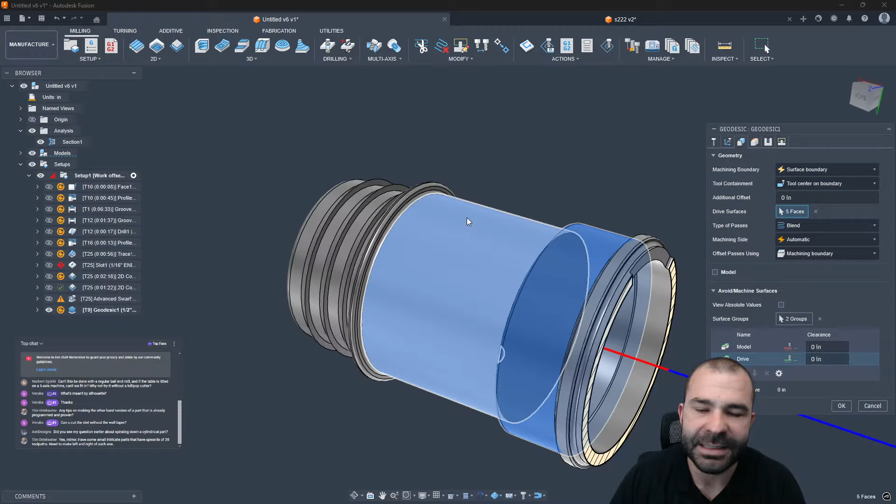And then from that, my geometry is going to be whatever surfaces you plan to machine, right? So we're going to grab these couple of surfaces. I'm going to swap out to blend. What blend will do is basically give me a consistent kind of step over versus a scallop type strategy. So Tim, yes, mirrored. I had some small pieces. Yep. And make left hand, right hand. We'll go ahead and visit that here in a second.

So first and foremost, did we achieve wrapping a tool path around a part? And the simple answer 100% is yes. So now there's a lot of different ways where we could do what would be referred to as a fixed angle, right? So one way to do that would be we could actually say, I want to lean, because we want the tool to lean left and right. And we could throw in either a positive or a negative 45.

There's also the ability to utilize what would be referred to as a tilt angle, right? So as you're seeing, there's a couple of different options to utilize for setting that angle. So I'm going to go ahead and slam in a 45-degree tilt angle. We're going to see what we can come up with. So we're going to give this a few minutes. As you guys can now see, I am at a fixed 45-degree tilt angle.

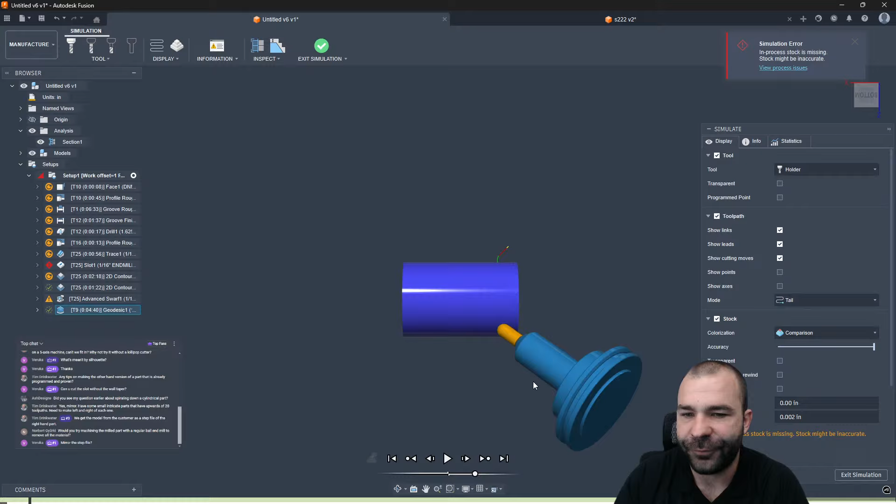And of course, if we go in and do the good old-fashioned simulate, we're going to hit play on this one. Maybe. I think my Fusion just froze. We're going to give it a second before I anger the Fusion people. Oh, it's because yours truly cranked his comparison way up, which they tell you is a big no-no when you're doing simulation. I'm also doing machine simulation when, you know what I need to do?

Here's a tip for you guys. You can reorder these things up here. So you could actually click, drag, drop. In my case, I never push the generate button here. Let's unpin that guy. Make my life much easier. And honestly, I also never use setup sheets. So I could unpin that one as well.

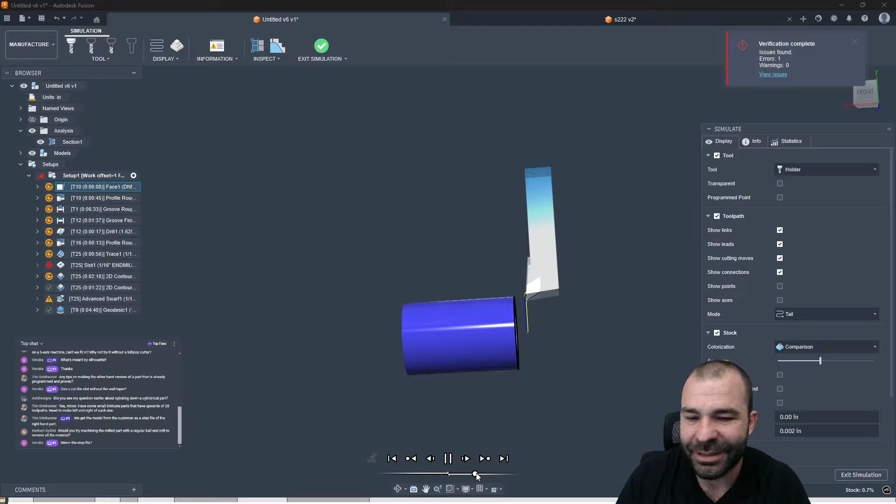Now we got what I would say is the perfect workflow, right? Simulate it with the fast GPU simulation so that we could see if there's any big problems along the way. And then from that, we could jump over to machine simulation from there. And I think I'm still out of sync here.

There we go. Let me regenerate this file here real quick. Can you not do fast GPU simulation on the lathe? I think we might have found something. Or we've got a million errors in here. We'll try to simulate just the one tool path. So again, we're going to go back up to simulate.

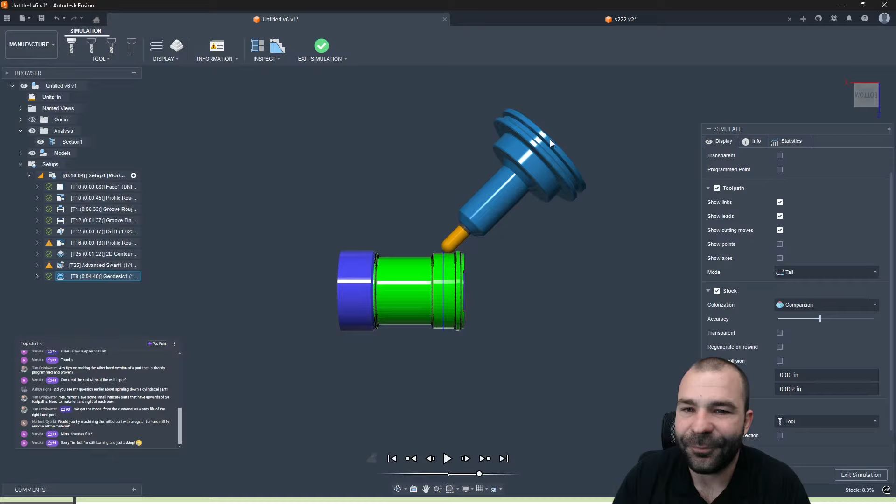And as you guys can see, actually 100%, I don't think you can do fast GPU simulation on a turning part. But as you guys are seeing here, let's go ahead and change this out. Let's make our tool stay stationary, kind of like if you had a B-axis head on the lathe, is what we're going for here. And again, this is going to look funky because our tool is now rotating around. We'll actually swap that back out to model.

It'll be easier. But yes, just like that, we utilize tilt and geodesic to basically set a fixed angle, or in this case, a B-axis rotation. Actually, I take that back, because the question was, can we actually tilt the part to the side and then spin around that part in simulation? And that's 100% correct, we can.

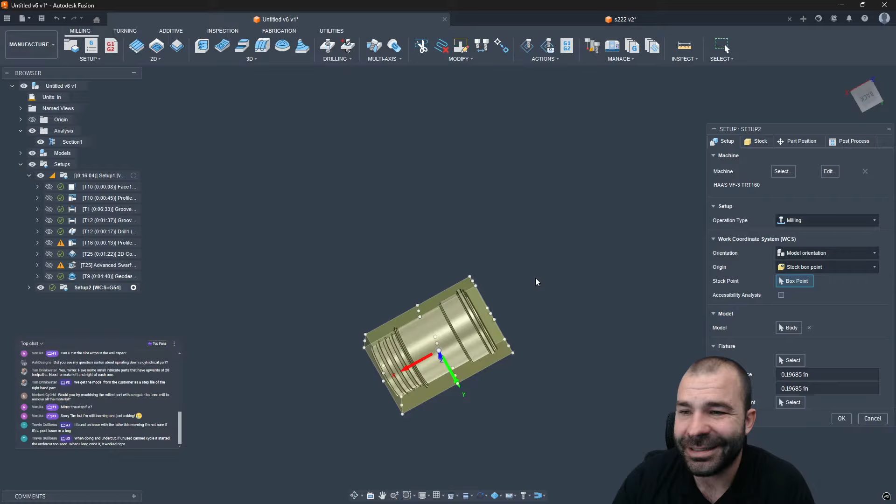So again, if I did a brand new setup here, selected a machine, you guys didn't catch it, we went ahead and built a VF3 on Workflow Wednesday, adding our TRT system in there. But let's say our Z-axis was up on this part. And as you guys know, I'm a big fan of from preceding setup, always utilizing continuous rest machining. There's our part sitting on our machine. We'll space her up in the air a little bit. And now we're going to go ahead and move our geodesic down.

So a few things I'm going to do here just for the sake of this part, getting our cycle times back down, getting a clean solid going into the second half, and then we're going to regenerate that toolpath and see what we get. Now, again, this is a TRT system. The question was about B-axis. I believe this is an AC configuration machine, but the concept is still going to be the same.

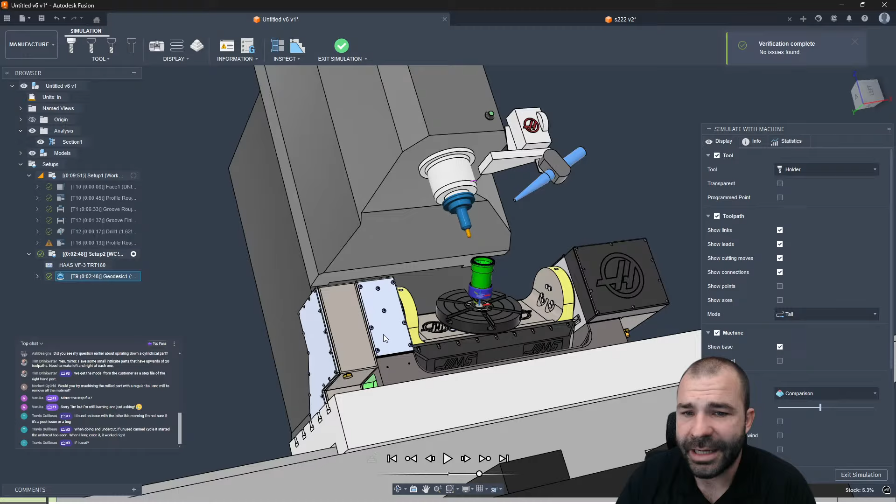So as you guys are going to see me do, we do the simulate with machine here because we have a machine. And now we can actually utilize tilting, but of course, now I'm backwards again. Once you change one thing, everything goes downhill. So we're going to keep the machine base still. We're going to tilt the part, and then we're going to see that part actually spin around center at a fixed angle. Again, the only thing I did here is I used the tilt part when I set up lean and lead, and I forced it into a 45-degree angle. So I hope that answers that question out there.

And with that, I see more and more comments coming in: issue with the lathe this morning. Not sure if it's a post issue or a bug. When doing undercuts, if using canned cycles, it starts the undercut too soon; when I long code it, it works right. Travis, I would have to get a little better example and see what you're talking about. When doing undercuts, I don't know how you're using canned cycles and undercuts. That would be something I would need to see a little bit more information about.

Yeah, Ash, no problem. I would be happy to explain the difference between the three options. So I do have another video out there. It's funny because I made a Facebook post about the fact that I was asking Google Gemini to write up some descriptions for me, and then it recommended my own video. And that video explains 5-axis control. It's an amazing video, by the way, not to toot my own horn.

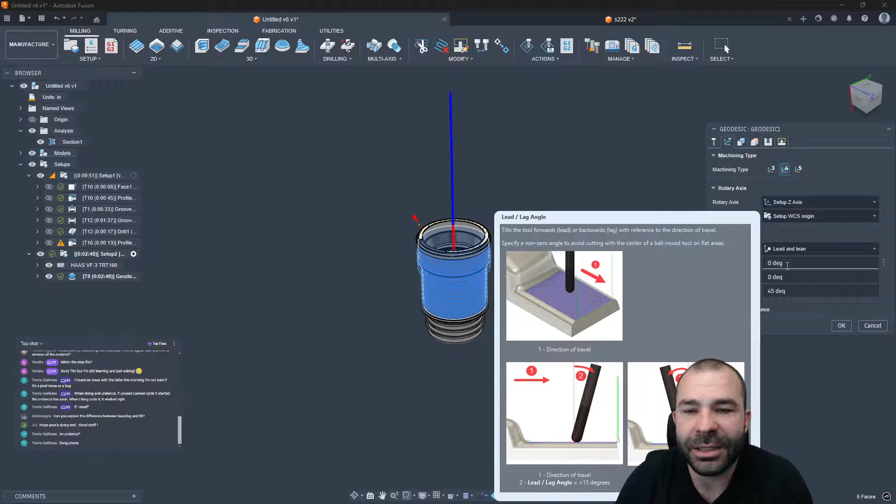So usually you're not leaning back. You could lean forward, very beneficial. Again, if you're trying to run in a straight line. The whole goal here is to basically get off the tip of the tool. Same with the lean angle.

This is where we're talking about tilting left and right, right? You have your pitch and your yaw and any other kind of configuration, but that's nothing more than controlling it to say, I want to lean the tool. Now, for those of you that haven't seen it so far, we've tilted and we told Fusion, just fix the tool at 45 degrees by using tilt.

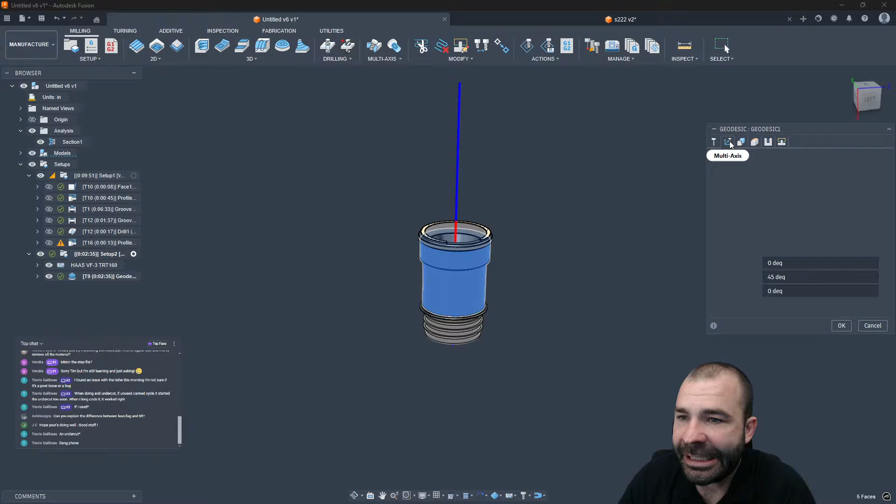Had I gone in and actually said, lean the tool at 45 degrees, let's go ahead and see here. I'm going to go ahead and turn my tolerance up. As you guys know, it makes for a very fast toolpath. But what can happen based on that information is it could lean our tool. Am I in the right? We are in the right. Okay. When we simulate this, it is going to lean the tool against the surface versus using a fixed angle of the machine, if that makes sense.

As you guys can see, we're coming down on this part. And now it did put us at perfectly 90 degrees. So I might have to do a little bit more adjusting to this, but that is what you're seeing as we machine across this. It went back to perpendicular on that surface, and we are getting a little bit more jumping around motion. Now, what I'm really trying to force for you guys to see is in the event that you're doing something like this, if we actually went to something like 15 degrees, you could get more or less tilt on that toolpath.

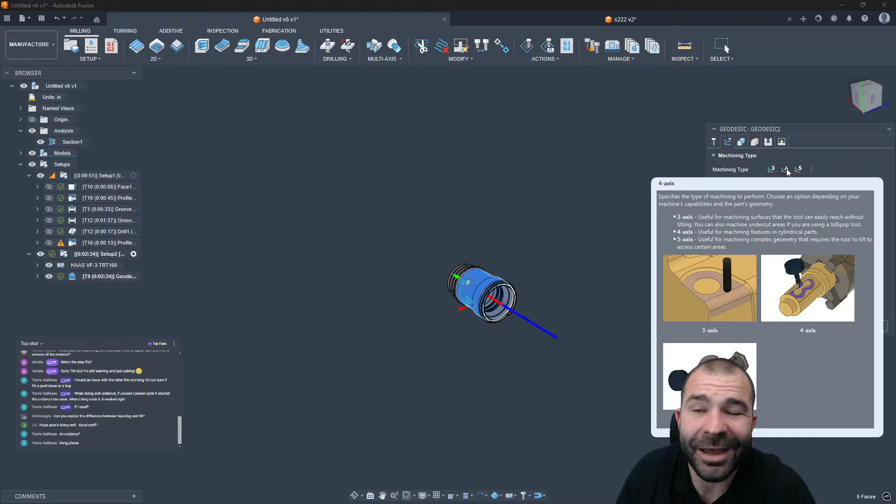So for some reason, and I actually know the reason, I'm using a 4th axis only toolpath. That's why I'm not getting 5-axis machining. So if we go 5-axis now, and we go back to lean at 45, again, what I was trying to convey to you guys is Norbert's question was he wants to fix and basically spin the C-axis. Well, obviously, when I say fixed angle, it can't lean on a 4th axis. So going to 5-axis and leaning will give you guys a much better idea of how this is going to work. Now, this is the dangers of it, right?

So I went positive 45. And for those of you that are new, just bought a 5-axis machine, I'm going to go ahead and go down to my toolpath so that we don't have to keep simulating this. But if I turn on tool axis in my options, I can now see the angle at which that cutter is cutting. So again, now we are dealing with a 45-degree lean.

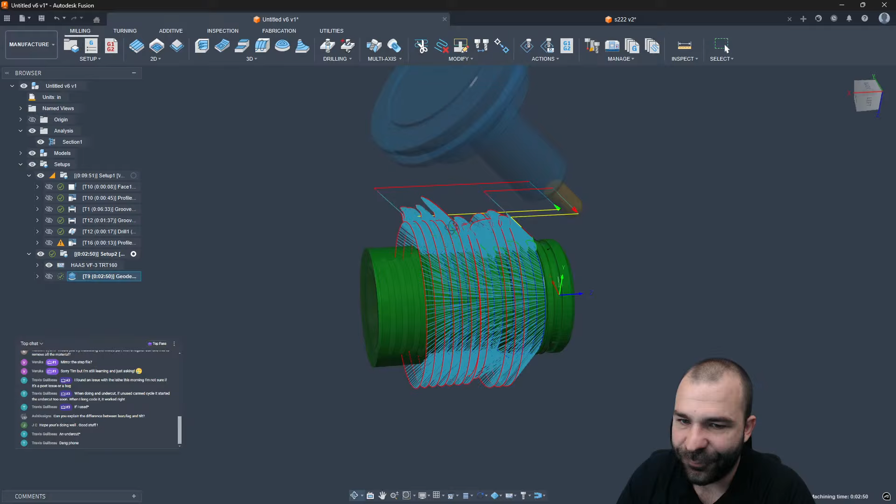And where it's going to get tricky is I don't think we have the right tools for this. Actually, you can start to see this in here. And I'm going to simulate this because you'll see it more. But it's trying to maintain 45 degrees of the tool. So when it wraps around this little profile here, it wants to tilt even further.

Now, before we simulate this, I'm actually going to swap out from positive 45 to negative 45. This will actually point our tool more in that fixed angle as questioned. But as you're going to see when we simulate this in a second, it's going to actually tilt up much more vertical. So with that, let me go ahead and jump back over. Ash, let me know, is that kind of explaining it for you?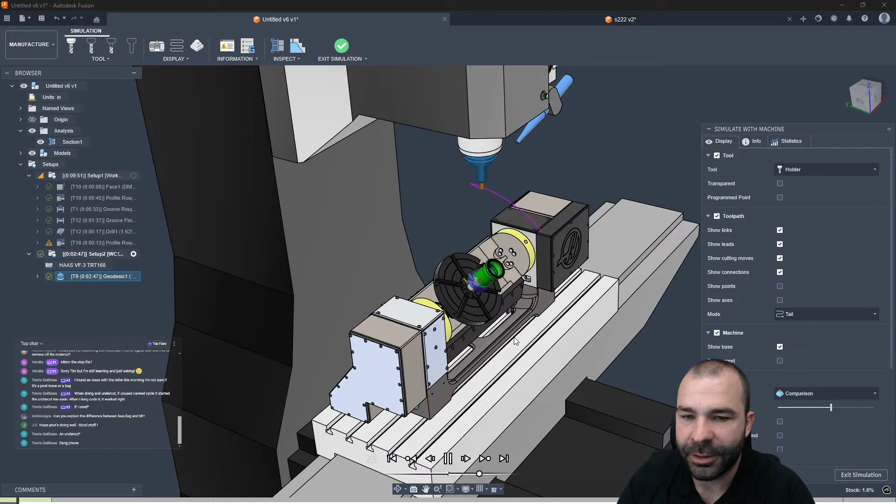I've got to get my machine sim spun around here. And again, what we're going to see here as we run this part is at some point, we're going to actually see quite a bit more tilt on the machine. Again, pro tips. We've got tons of pro tips for you guys. If you didn't know this, you could actually populate the info tab. You can look at the machine position and angles as well. So as you'll see here, currently our A axis is at 45 degrees.

That's behind my head, isn't it? I should get out of the way.

And eventually you're going to see 45.3. We've now adjusted more. We're now at 65 degrees in our A. So again, lean and lead are always trying to go off of the surface. Tilt is basically at a fixed angle. So Ash, great to see that cleared that up for you.

Travis, let's get back here doing undercuts, doing an undercut. If used canned cycle, it starts the undercut too soon. When I long code it, it worked right. Travis, I'm still going to need some more information on that particular use case.

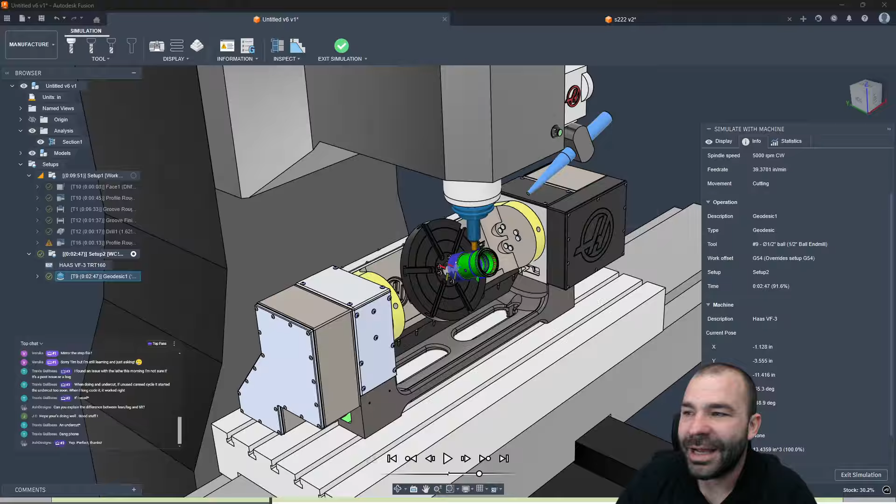But I am going to jump back to Tim's question about a left hand, right hand kind of scenario. Now, it can be painful if you have to machine a left hand, right hand kind of part, because one way you can cheat it is you could take your toolpaths, and if you go up to setup, you could actually do a new pattern. And with that pattern, there's what's called mirror pattern. Now, by turning off keep original, you can actually reverse everything on your part.

Now, the problem is going to be the plane that you mirror across. You really have to pay attention to what you're mirroring across, right? So if I mirror across right here and I hit OK, the problem is going to be my toolpaths are far over here to the right. However, my work offset is still over here to the left.

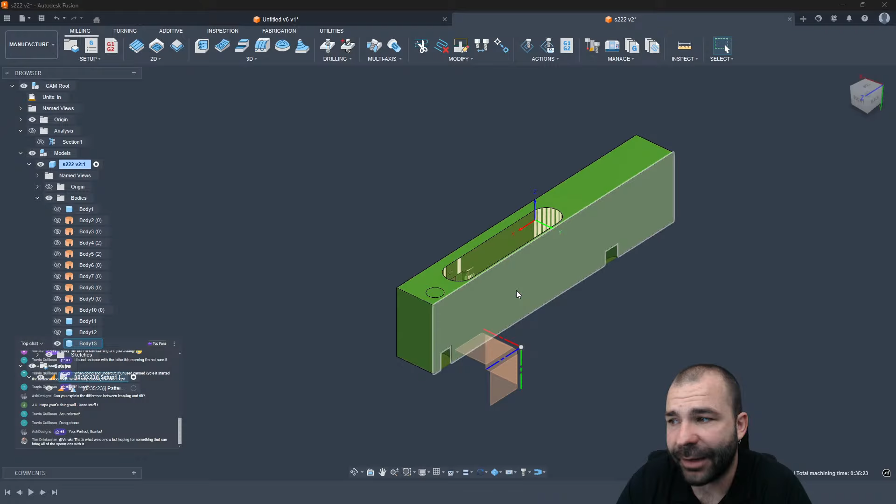So in most cases, if I have to deal with programming a part that is a mirrored situation, I have a tendency more just to jump back to design. Again, I will just go up to create, mirror, pick what I want, go across the plane. Just like that, I now have a left-hand, right-hand version. So in my opinion, it's better to do it at the model/component level than it is to mess with the toolpath.

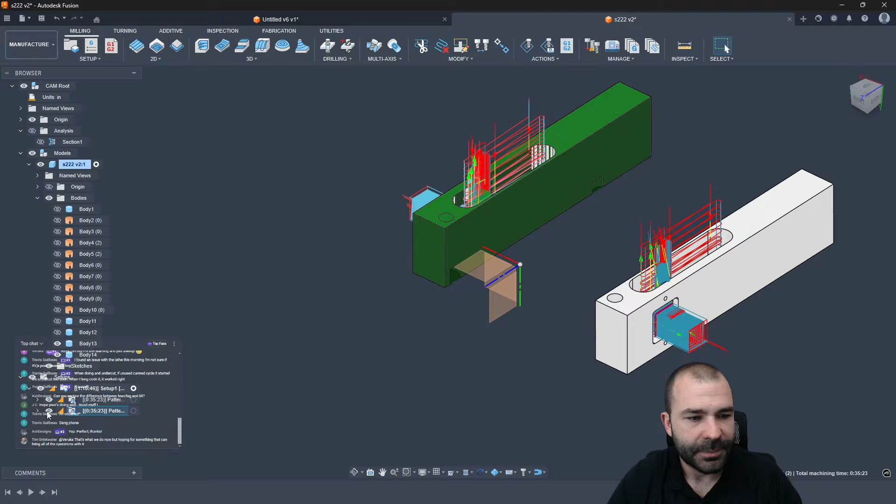Now on the toolpath side, why you also wouldn't want to do this, I'm going to simulate this for you guys. I think we can get away with simulating both. Would actually like to simulate just one toolpath, but I don't think it's going to give it both of them here. Yep. So we're going to do some Hollywood magic. We're just going to duplicate one into another. And then what I want to do is remove a lot of this out of here. So let's see if we can simulate the pattern now. It is not. Go back.

Now let's simulate both of them. Probably should have made a much cleaner toolpath here. Let's fix it. Let's do this the right way. Selection, top height. We do not need a ramp clearance of 0.1. And let's see what else we got going on here. Here we go. Quite the big ramp, don't you guys think? Like there's two toolpaths in one, as if somebody double selected contours here. Let's see what's going on.

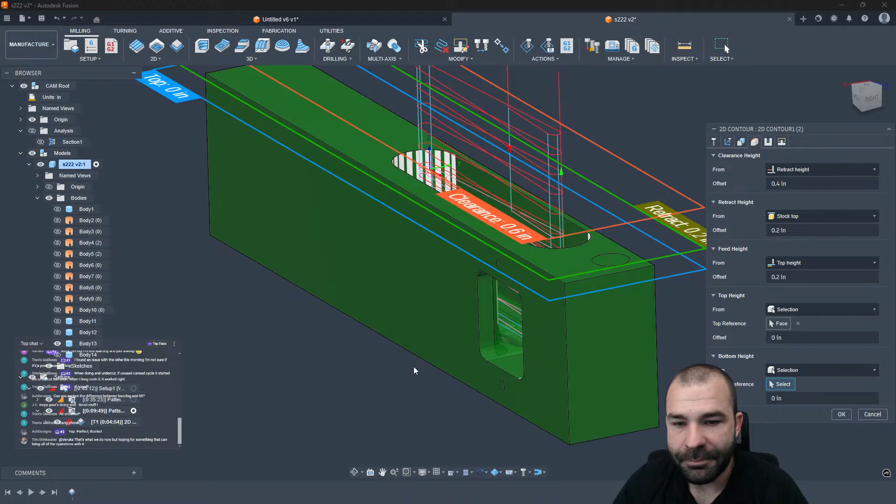Did I lose my bottom reference? I did not. Guys, we may have found a really good bug inside of Fusion. If it's not in the pattern, still looks like complete problems here. I don't think it's our ramp, but it could be the ramp. It's definitely doing multiple step downs, and we don't have multiple depths turned on. So I think we just found a bug. But either way, this is still going to work for the nature of what I want to show you.

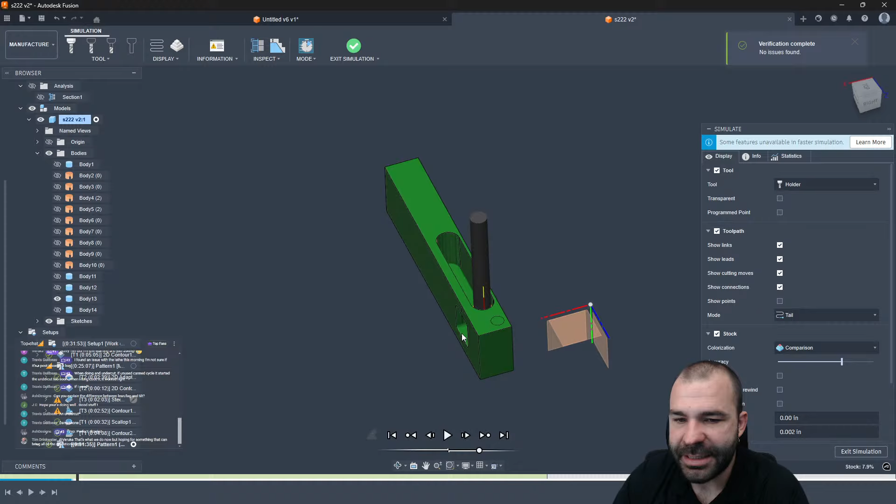So when I simulate this, on this first part, pay attention which direction this cutter goes. Because right now we are climb milling up, down, and around our part, right? But when we jump out of our part and move over to the other side, which is going to be tricky because you're going to have to pay attention to the actual toolpath, if you notice, we're now conventional milling on the other one.

And I can go ahead and turn on all the toolpath. But again, notice how we're coming up the left side here and back down the right side, which means we're conventional milling. So when it mirrored, it literally mirrored everything, right? So it's running your tool backwards. Again, can throw your tolerancing off.

This is where when I program mirrored parts or have to deal with left-hand, right-hand versions, in my opinion, I tend to set up programming my part with automation, utilizing things like templates so that I can quickly move from one part to the other. So getting back over there, guys, any other questions out there?

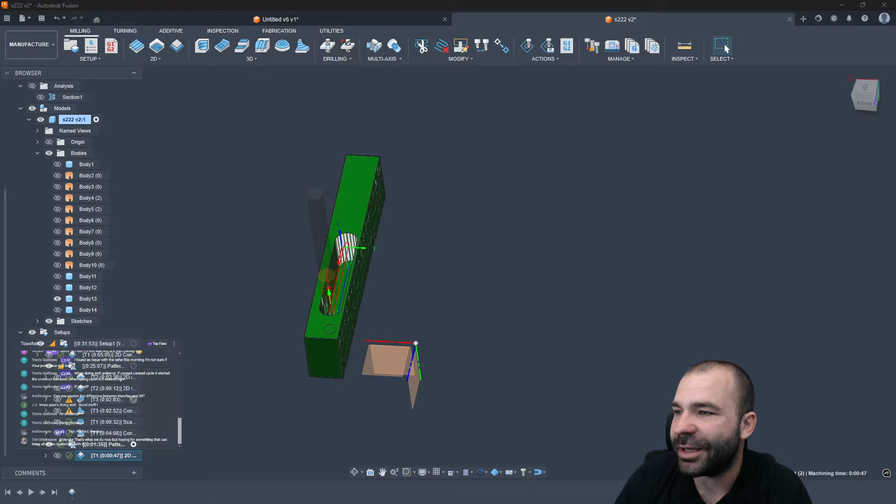Hoping that somebody can bring all of the operations with it. Yeah, the left hand, right hand type of scenario is one of those things that, again, is not the strongest suit inside of Fusion, because as you guys saw, when you mirror the toolpath, it kind of throws everything off. Now, in my opinion, again, guys, you can build out quite a bit of automation to be able to automatically generate those toolpaths.

This would just be an example from me to you: if I would go in and do something like 3D contour instead of normal contour, you could actually generate kind of the same results based on, you know, again, silhouette, tool inside boundary. I want a large step down based on my tool. Again, a lot of things that you can get away with here to set up and machine, right? With that, I'm going to go ahead and jump back over here.

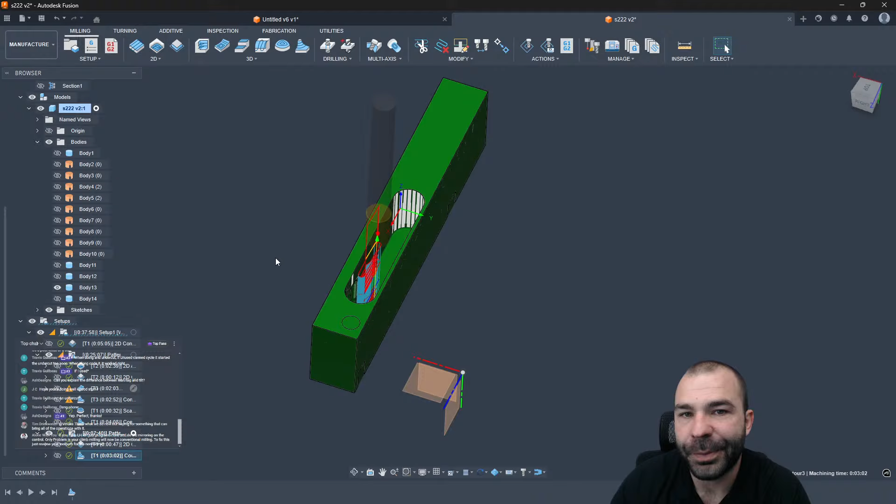We got another one. If you have a left hand, right hand, just program one and do the mirroring on the control. Only problem is climb milling will now be conventional milling. Yes, 100%. You would have to go in and start reversing toolpaths and stuff like that as well. So again, just for you guys at home, when you mirror this, you go in here. One, we're going to go ahead and turn off keep original.

And as it's being suggested here, if we go in and see our toolpath, if we were to switch from left to right, from there, we would also have to reverse our chain. Actually, we shouldn't have to reverse our chain. But if I was to simulate the mirror now, you'll notice that we are now working with the confines of climb milling on the mirror versus conventional. So this could be valuable or a complete pain. You guys will have to let me know.

There are a few more tricks here. I could go through and do a compare and edit. And then you do have the ability to say, I want to bulk update a field. You will need to know what that field is, of course, which is going to be sideways compensation. I just want to double check it on 3D because I think it's now direction, right? So in 3D, it's direction, but in 2D, it is sideways compensation.

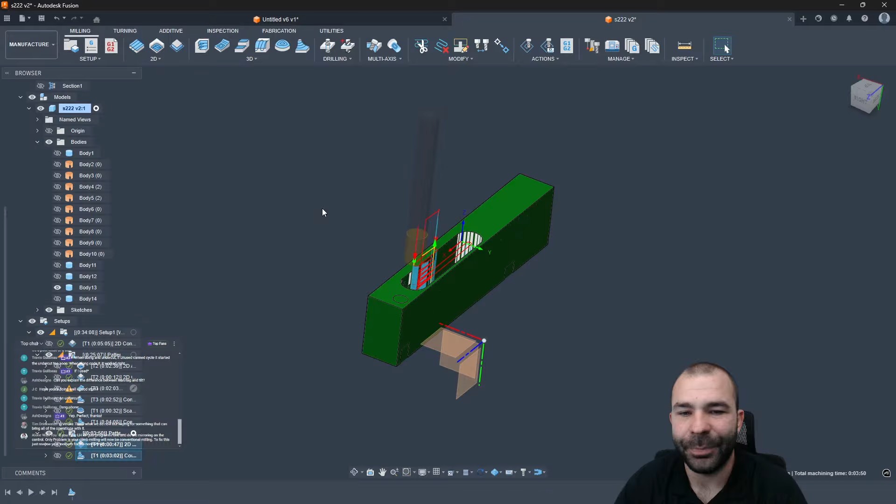So again, you'd have to find sideways compensation, update your 2Ds, and then your other one, of course, would be, I can't even remember what it was. I've already lost it in my brain. I just feel like it's 10 times more steps versus setting things up the way you guys saw. Now, I'll spend a few more minutes on this because I want to show you guys a few things that I think people overlook when it comes to a left-hand, right-hand scenario.

Because if I was in design, this is probably not going to be the best example because there is a lot in this part. Let's pull up a new part. Don't save. I want to get a file that is actually built out the way I recommend. So we're going to go back to the good old-fashioned 2D strategy. Now, for a lot of you guys out there, if you didn't know, what I tend to recommend at the end of the day is start with a blank file when it comes to your actual CAM side of things. And you could save that.

In this case, it's going to be 2DS manufacturing. And of course, because you guys know me as the most organized person possible, Free Support Friday, we'll get it thrown in the right folder. And then, this is my recommendation, you're going to insert that file, which is going to allow you to keep it linked in case you have rev changes, in case you have customer updates. And it also prevents your guys on the floor from breaking or changing the original part, right?

So now from that, a couple of neat tricks that you could do: before I go from left hand to right hand, if I needed something like particular pockets or certain features, this is where something as easy as doing offset surfaces could also be very beneficial. Because if I went in and actually snapped an offset of this pocket here, for example, I would have that as a quick reference later on.

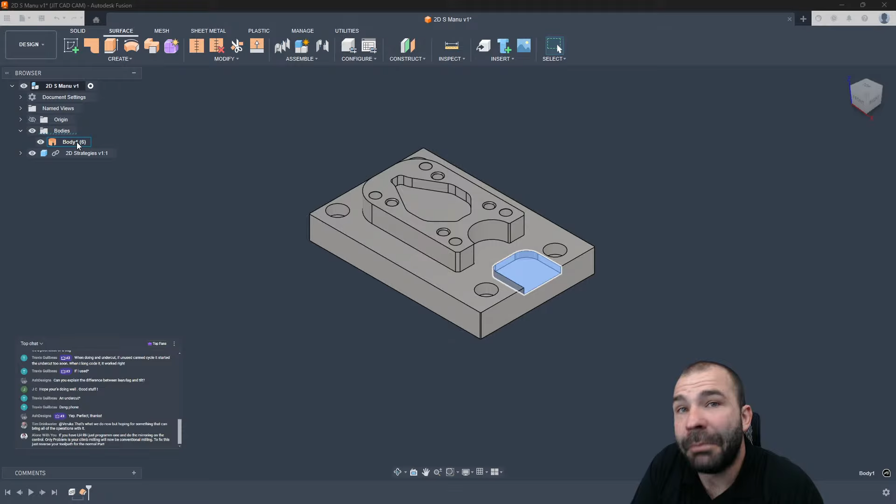And what you guys are seeing is that is now that inside pocket area, which is technically a body that if I'm using model, I can auto-generate toolpaths from. The other side of that is that when I get to that point of doing my mirror, again, this is the fun of this, is I could actually say, you know, I want to mirror bodies, components, whatever it is. I can take and mirror everything, right?

So again, as you guys can see, I don't want to join. That could be a new body. I'm going to repeat mirror here real quick because we're going to do the component. Same plane. And I just want to get you guys an example here that you now have your original, you have your mirrored, you have your mirrored pocket.

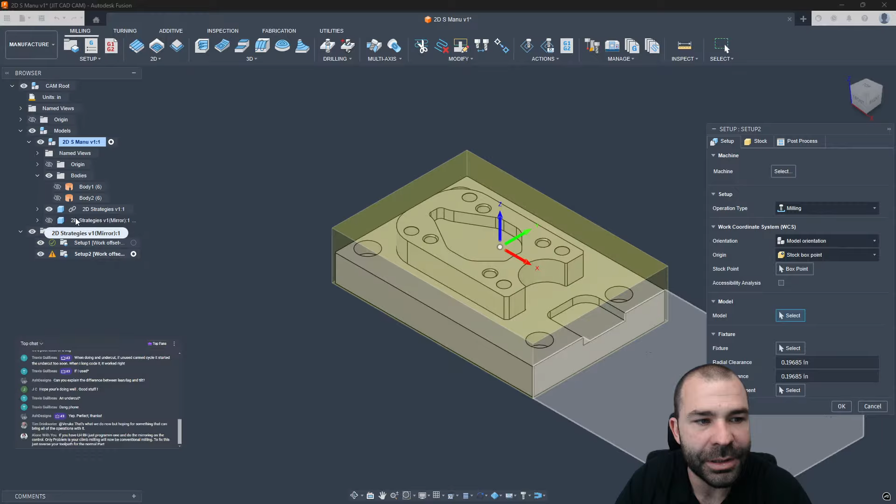Again, getting back into manufacture, when I do my setup for my first part, my original model is going to be my part that I wanted to make. My new setup for the mirrored one, again, that part is now going to be the mirrored component I made. Of course, you don't want from preceding stock. And then when it comes to making those toolpaths, let's say we go 2D adaptive clearing. You have that ability to do a pocket selection. Of course, you could manually pick it.

Again, this is the fun of this, that you could use face contours, or if you're 3Ding, right? I could actually base my 3D toolpath off utilizing model, not the setup model, and then I could use that surface that we generated. Again, this is just an example. Don't get too caught up in this. This is just a neat way to rinse and repeat, utilize things like surfaces on your part to your advantage. As you guys are seeing, of course, there's a lot of other things going on, but that offset surface can be quite handy.

There you go. Pavel out there with the tip, using a script that copies your entire setup and reverses the machining direction in all operations.

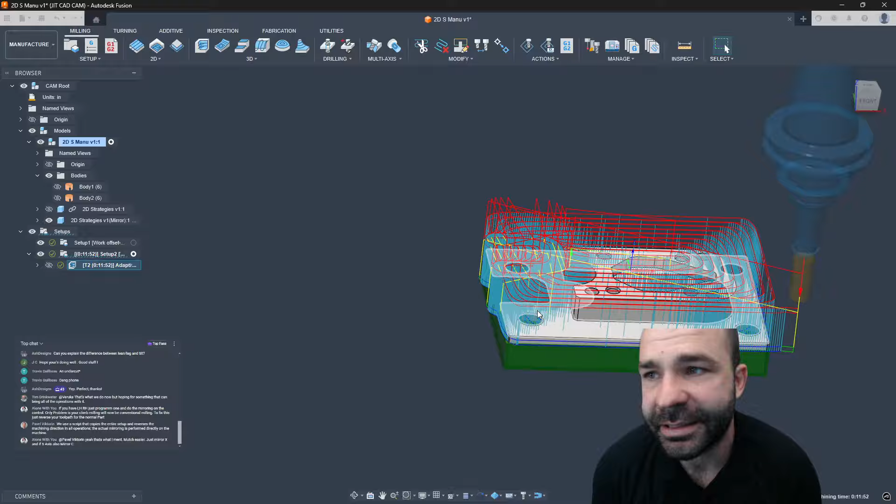So as you guys are seeing, again, mirror X and 5-axis, also mirror C. Yep. So again, a lot of guys out there with the concept of mirroring are switching the axis directions at the machine. Cool. Any other questions outside of that, guys?